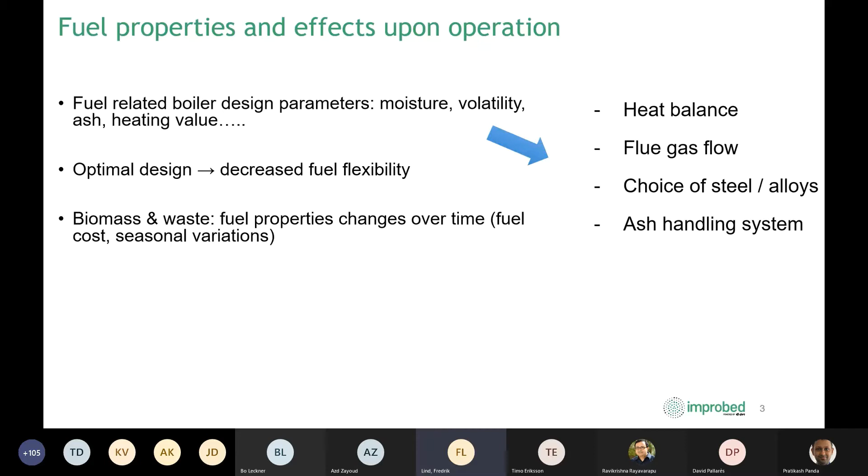One thing which is quite common or well known is that biomass and waste change over time the fuel properties, because we actually follow fuel cost, and there can be seasonal variations of the fuel. One example of this is a quite new build boiler in Sweden, Stockholm, which was taken into operation in 2018. It's a quite large biomass-fired boiler, 400 megawatt thermal. It has also been equipped with a pilot CCS these days.

After 1 year, they realized that they would like to change the fuel mix and add on 50% of recycled wood waste. This, in fact, led to them having to totally rebuild the ash system if they would go for this.

The mixing of air and fuel: there has been a lot of changes in this way, where you can actually feed air in many positions, increasing the possibility for the fuel to meet the oxidizer. We also have much faster O2 analysis today, which gives the system a chance to react on a change in the fuel feeding.

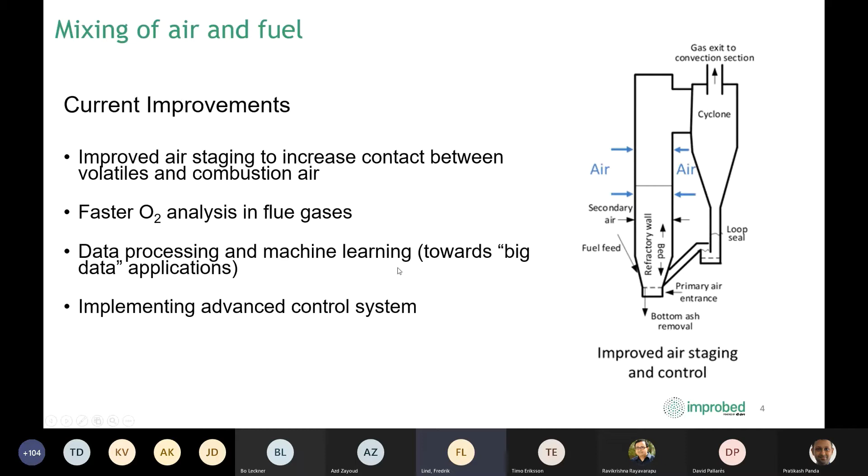We also discuss today artificial intelligence and how we can learn from big data and how we can actually apply this to get a more robust and fast system. In other words, we can implement quite advanced control systems today.

Instead of fans for the air feeding, it has air compressors, which can increase the pressure of the air into the boiler, meaning that you can penetrate more into the furnace. It also has a quite advanced control system.

So questions, does this work? Yeah, it works good, but sometimes you have CO violations. You could have high furnace and cyclone temperatures due to uncombusted fuel going into the cyclones. And this can also create sometimes a lower operating time than you actually prefer.

We've seen in our boilers that we have somewhat maintenance experience that comes back, or maintenance issues. For example, in one of our 75 megawatt CFB municipal solid waste boilers, we had a problem with the vortex finders in the cyclones. Due to that, we have sometimes high temperatures due to uncombusted fuels going into the cyclones.

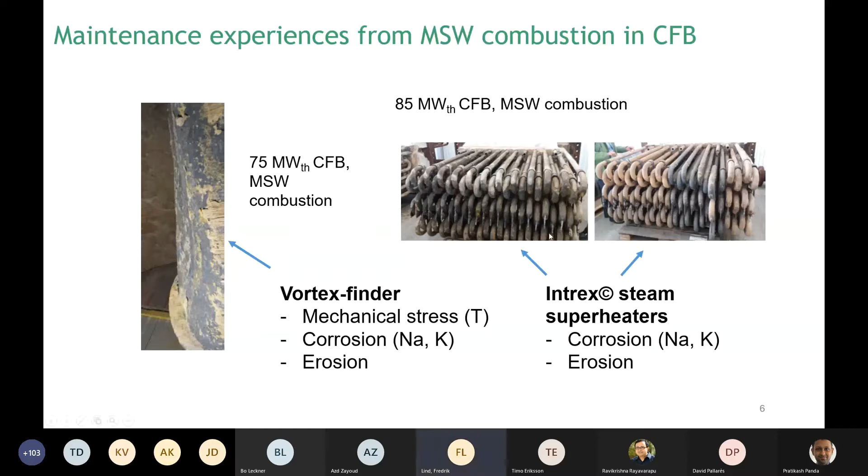We also have some corrosion issues from potassium and sodium, and erosion from the bed material itself. We can also see that our Intrex steam superheaters in the bed's loop seals are affected by corrosion and erosion. Actually together, corrosion and erosion can be a really big issue, because as you have the corrosion, you create this protective layer of an oxide on the tubes. But then you have the erosion from the bed material that all the time takes away the protective surface.

So if we talk about bed materials, the object of bed materials is to secure the heat transport. That is if there's not enough ashes in the fuel, so that can be the bed material. And it should also be the right particle size. A bed material should have high abrasion resistance, but it should also have a low erosion impact on the boiler material. There are a lot of different bed materials, and those have different properties.

They could be active, and they could need some things to be activated. And we know that alkali interactions could lead to agglomeration. As far as I know, on the research basis, there has been lots of tests of different bed materials. In Sweden, for biomass and waste combustion, silica sand is still absolutely the most common bed material. And the price is somewhat $50 to $65 per ton of this bed material.

So, some conventional fuels and bed materials in fluidized bed combustion. If we start with coal, the characteristic of your fuel is that you have a rather high heating value. A lot of the ashes are actually bound to the minerals in the ash. The bed material is the fuel ash and also sulfur capture agents like limestone, for example.

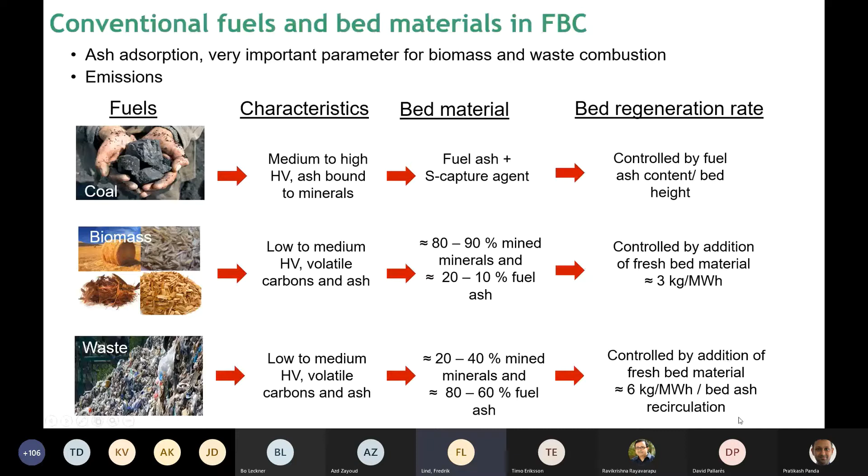And this is also something that you would like to control. As you have more problematic ash components in waste combustion, you would like to have a higher degree of regeneration. So you more or less double the amount of fresh silica sand per megawatt hour. Of course, it also depends on the quality of your bed material or your ash handling system after the boiler. I will discuss this some more later on, but the focus of my presentation will be on biomass and waste.

So silica sand is the cost. In Sweden, we consume roughly a little bit lower than 200 kilotons of silica sand each year for the purpose of combusting in fluidized beds. This actually corresponds to 25% of the total amount of silica sand extracted per year, and a price tag of around $10 to $12 million each year. So this is just what we put in as a bed material.

Some trends in Sweden and also Europe is that there is an increasing demand to combust waste fuel, cheap fuels, and also more complex biomass fuels. In Sweden, for example, we are now phasing out the last coal units, and we also reduce or even take away all the peat combustion. This is seen also as a fossil fuel in Sweden, or at least there is a CO2 tax on this.

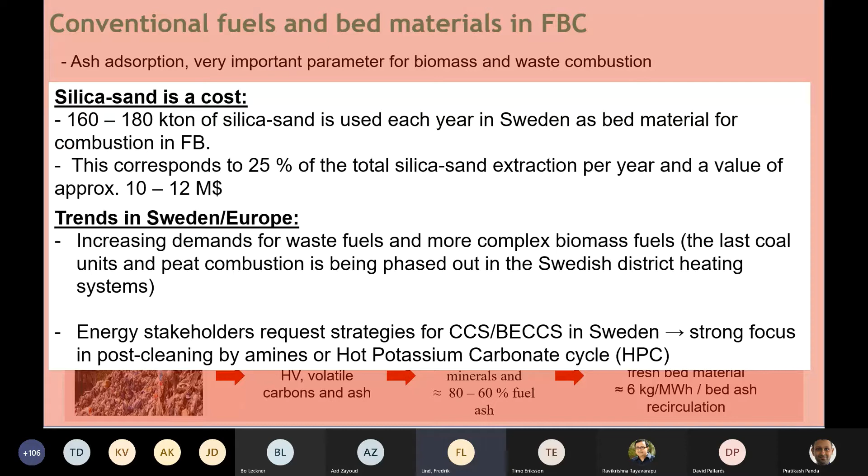I can also see in industry that energy stakeholders, both from the energy users and energy producers, are starting to discuss or request a strategy for carbon capture and storage. And in Sweden, there's a lot of discussion about carbon capture and storage. However, since there is a lot of existing infrastructure, there is a lot of discussion on post-cleaning by amines or hot potassium carbonate cycle, which has been used, for example, by Stockholm Exergi, a Swedish utility company.

So what is an active bed material? An active bed material is something that should introduce more benefits to the combustion system than the ordinary bed material. In this case, I will discuss something which we call oxygen carrier aided combustion. This was a concept that we developed at Chalmers, and simply is that you have a bed material that can do more things than just being a heat carrier.

Of course, it's not completely true, because silica sand, for example, in biomass and waste combustion, will also take up ash, which is good because then you have less ash in the volatile phase that actually ends up on superheaters or heat exchangers later on.

But one of the major points with oxygen carrier aided combustion is that you use a bed material that can transport oxygen inside the furnace. So you can simply take up oxygen and transport oxygen.

And there can also be other effects by ash. For example, that the ash is not ending up on the surface of the particle, but it instead migrates into the center of the particle.

Commonly, we discuss those from a perspective on natural ores. This was also discussed a bit by Bo Leckner with chemical looping combustion before. But in this case, we do everything in the same furnace or in the same reactor, so in the furnace of an existing CFB boiler.

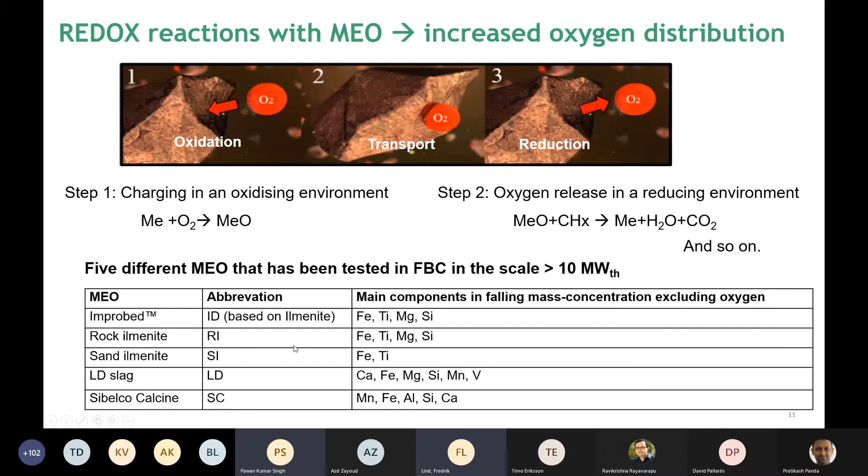So to give you some idea of what we have been doing with this kind of research, we have been working at scales from 12 megawatt, the Chalmers CFB research boiler, up to around 170 megawatt. We have tested a lot of different fuels, everything from really nice fuel like wood chips up to municipal solid waste, peat, and a lot of recycled wood.

Most of the tests have been done with Improbed, which is based on ilmenite with certain characteristics, so I will focus on ilmenite from now on. Ilmenite is a naturally occurring ore. It has a higher density than silica sand, roughly 2,600 instead of 1,600 kilograms per cubic meter, which changes the fluidization properties somewhat, so you have to adapt the particle size accordingly. It has been shown to be less abrasive than silica sand and less prone to agglomerate. Another important thing is that it's possible to separate it from ash using a magnetic field.

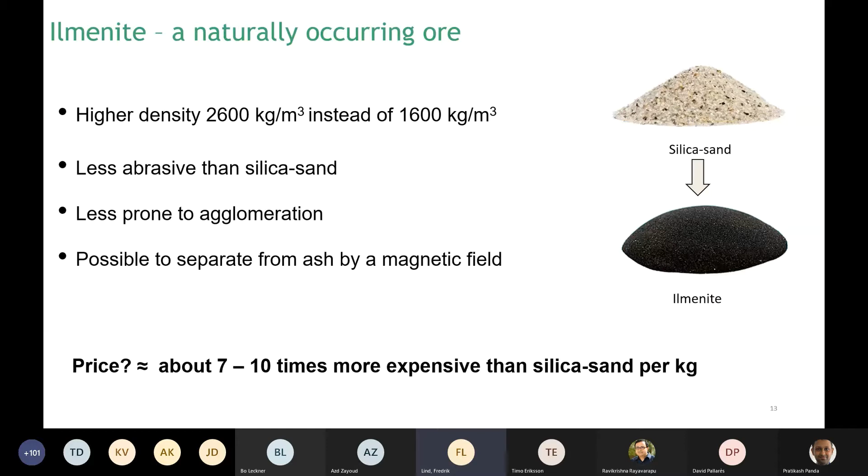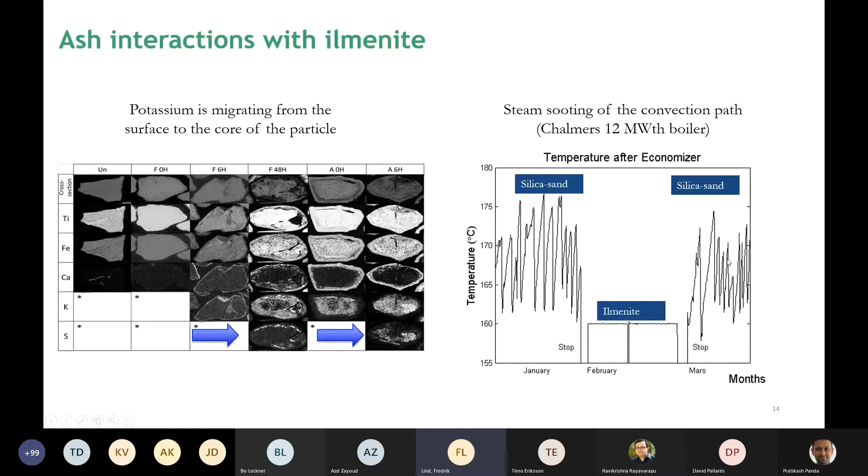So one explanation could be that we actually take up the ashes inside the particles. Another could be that you have a more smooth temperature profile in the furnace due to the oxygen transport, giving less locally high temperatures that can melt ashes which would otherwise end up on the heat transferring surfaces—so something about increased oxygen distribution.

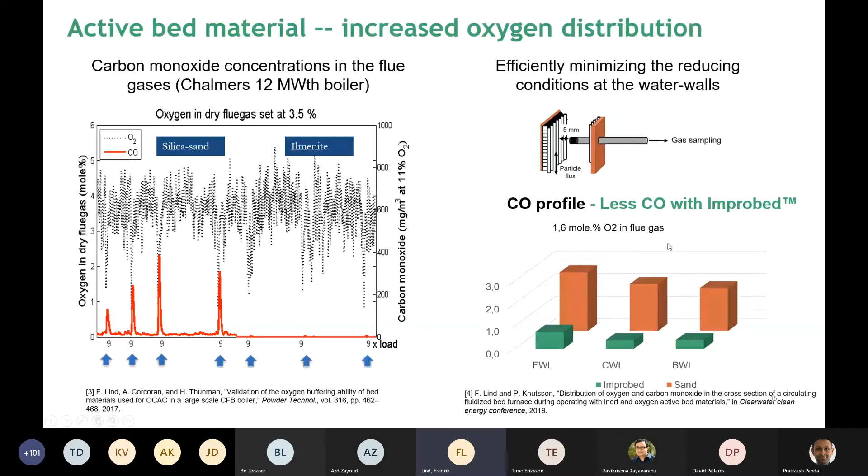When we operate with silica sand, we got a certain concentration of CO at 3 different points: the front wall where we have the fuel feeding, the center, and the back wall. Compared to when we stopped the boiler and operated with Improbed, there was a drastic reduction of CO close to the wall, meaning there will be more oxygen present close to the wall when you use Improbed instead.

This was in pilot scale. Now we tried to also do this in large scale, so we did it in one of the municipal solid waste fired boilers at Händelö.

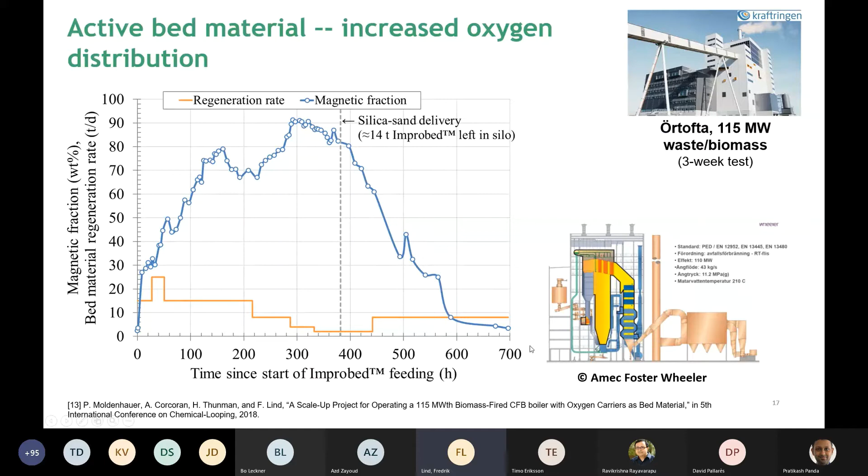So we could follow the concentration profile in the furnace using this equipment, and how much of the Improbed material actually was inside the furnace. We could see that as much as 90% of the bed was magnetic, meaning it was Improbed. We also tried different amounts of feeding to the system, and at some point we put in silica sand, and you can see a drastic reduction of the Improbed in the system.

So what could we see from this? In this case, we could actually increase the boiler load from 115 to 123 megawatts. And why could we do this? Because we could reduce the O2 into the boiler - we can reduce the surplus of oxygen. This is due to the fact that you can distribute the oxygen in a more proper way.

You can also see that we increased the boiler load by 8 megawatts, which is actually a 7% increase. This has never been done before in this boiler.

This is also an effect you can see: you actually reduce the amount of oxygen into the system. With silica sand, if you sum up all the gases - primary air, secondary air, and recirculated flue gases - you will have a certain amount of gas all the time. But as you remove air, you can also reduce the recirculation of the flue gases. As this material is less prone to agglomerate, you could actually have less flue gases out from the system. This gives you the ability to increase the fuel load, as you will not increase the velocity of the flue gases that could affect the convection path.

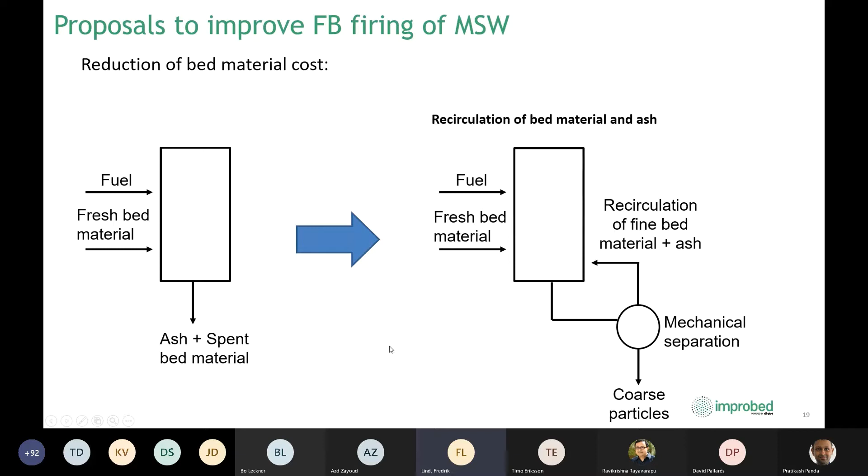Another way would be to also introduce a magnetic separator in this. So basically, you will have oxygen carriers. In our case, as I said before, we have been working with ilmenite and improbed. So what you do is simply take out the bottom ash stream, run it through a separator. You will have out the coarse particles, but all the other particles will go over a magnetic separator. And the magnetic particles, meaning mostly the ilmenite and the improbed, will then be transported back again to the furnace.

So in that sense, you will have a recycling of the particles. And the particles which are not magnetically attracted will simply be sent to the bottom ash system. And this will also include ash and spent oxygen carriers.

This system has been implemented now in one of our facilities in Sweden, the 75 megawatt municipal solid waste fired CFB boiler. And with this, we could see that we could actually reduce the total amount of fresh bed material from 11 to 0.8 kilogram per megawatt hour.

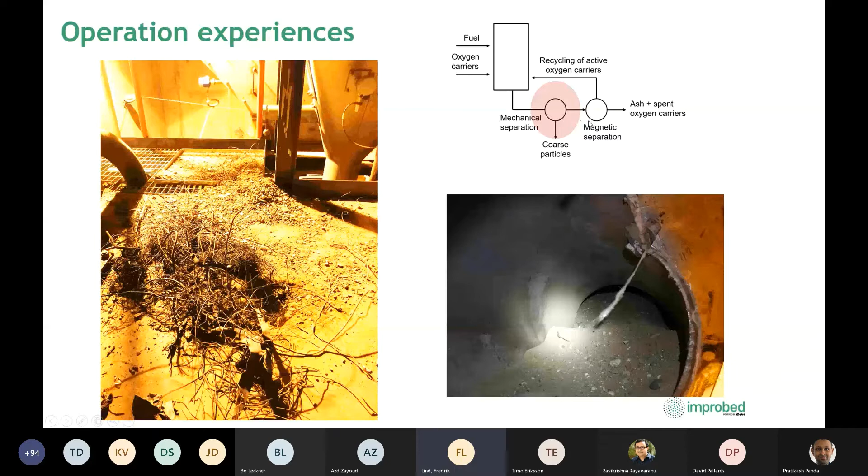However, there are some experience and some issues with this. We've learned that municipal solid waste is quite a tough fuel - you can see all the metal threads that come in with the fuel, and they get stuck sometimes in the sieving equipment. So this is now rebuilt to have a more robust system, but the magnetic separator works actually properly as it should. So this is something that is now being rebuilt.

There is also another twist on active bed materials, and as Bo was mentioning before about chemical looping combustion, we also heard about oxyfuel combustion in fluidized beds. This has been done a lot in research scale, especially chemical looping combustion in research scale. We think that what you can actually do is use those experiments done now at large scale, because we have tested different oxygen carriers.

We have learned much more about lifetime, and also, not to forget, which you never really see in those lab scale experiments, is the ash interaction that appears with oxygen carriers, and also boiler performance on how this works. So we believe that this can actually motivate learning more about oxygen carriers and what kind of technology you choose with the fluidized beds. The oxygen carrier could actually make a great effect. One of the motives is that you could already benefit from using this OCAC concept, because you could get things like increased efficiency and less agglomeration, for example, if you have issues with that.

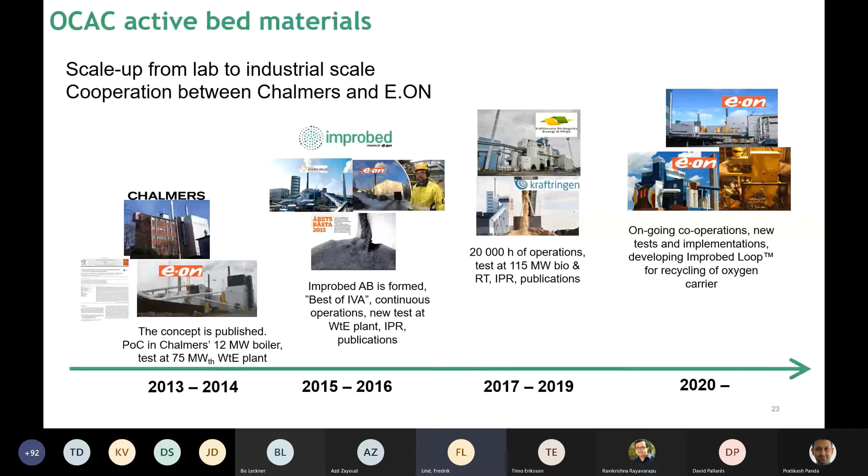To sum up, we need to learn more about this system, how to recycle the bed particles, because it's still more expensive than silica sand, but we can see that there are great benefits from using this bed material. So I'll stop there. Thank you for listening.

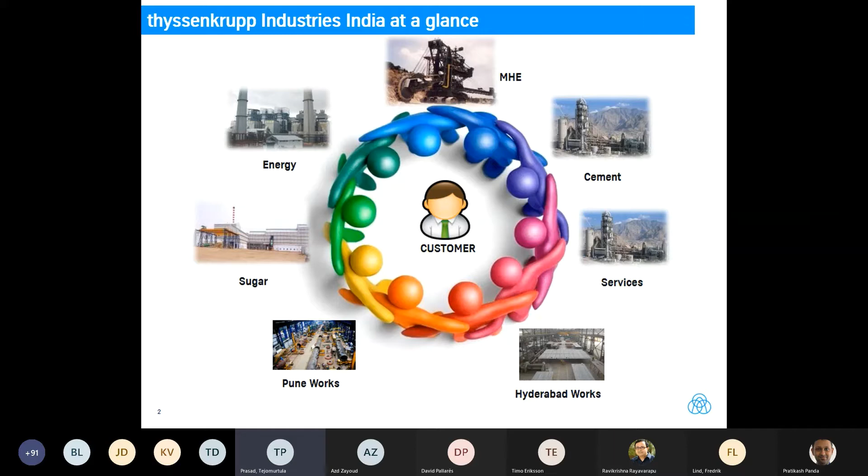We are committed to the environment. We make fluidized bed boilers, also cement waste heat recovery plants, steel plant waste heat recovery plants, biomass fed boilers, to name a few.

These are the offerings we have. We have reheat in the range of 300 megawatt, 300 tons per hour up to 1000 tons per hour. We have non-reheat up to 500 tons per hour designs available. We have vast experience with bituminous coals, as well as petroleum coke, lignite, and also to some extent biomass firing. We also have experience with hydrogen firing.

Mr. Prasad, you're muted. Could you please unmute yourself? Yeah, am I audible now? Okay, I'm sorry.

We have a technology which is quite different from the rest of the world. We have complete heat transfer surfaces in the first pass. Our cyclones work at a temperature in the range of 400 to 450 degrees Celsius, and then the ashes are recycled back, which we call cold ash recirculation.

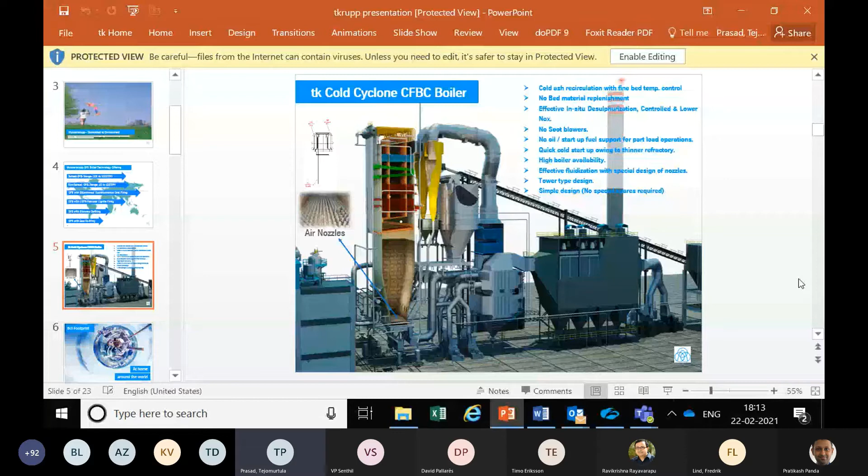We have no bed material replenishment required. We have effective in-situ desulfurization and very good control in reducing NOx emissions. We have no soot blowing equipment, and we don't need any oil to support part loads or low load operations. Since we have very thin refractory on the membrane walls, our startup times are much quicker, and we have demonstrated very good availability on most of our units.

We have exclusively improvised the design of the nozzles, which creates very effective fluidization in a tower type design. Normally, no special spares are required for our units.

We have a footprint at home of about 75 plus units across India, firing various fuels from low ash, 4%, to very high ash up to 60-65%, designated as washery rejects from coal washeries. We also have units with sulfur content from decimals up to 8%, which is petroleum coke, and units working with low moisture fuels as low as 4 to 5% and as high as 40% moisture coals, called lignites.

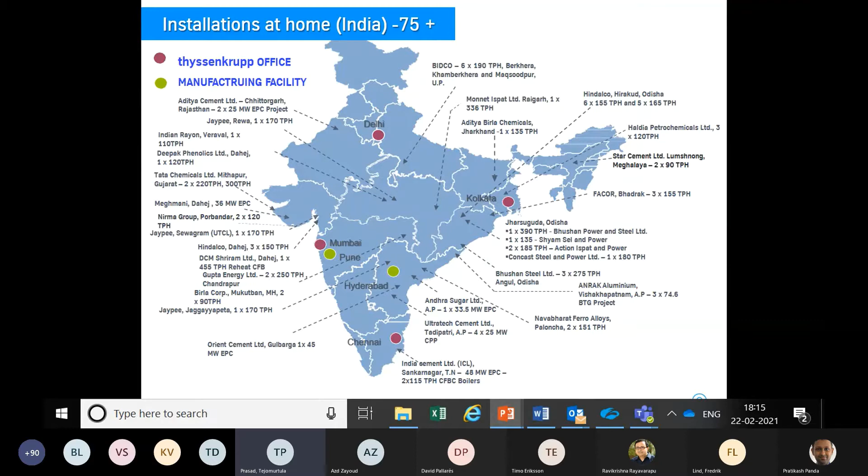Across the globe, outside India, we have 6 references: 1 in UAE, 2 in Indonesia, and 3 in Philippines.

Coming to clean coal technologies, there is pre-combustion cleaning, designated as beneficiation, washing, or coal drying. As the gentlemen before me already explained, there is gasification which can be on fluidized bed. Then one route is fluidized bed combustion, which is CFB. The fourth route is post-treatment after combustion as gas cleaning technology.

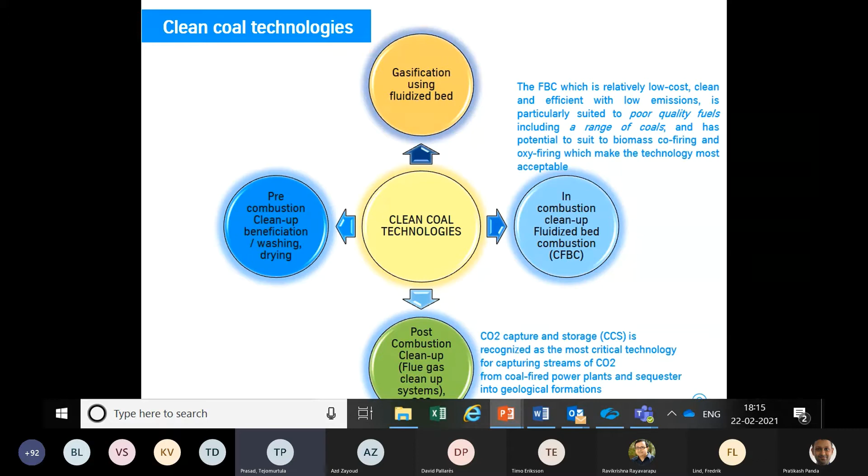Coming to CFB, biomass can be used as an alternate fuel apart from coal, as co-firing.

This has already been displayed by all our colleagues, right from Dr. Saraswat. As you move from the easier fuels toward the more difficult ones, you find fuels that are difficult to burn, needing careful analysis and design of the boiler to provide proper availability, proper combustion, and to handle emissions. These are all more challenging.

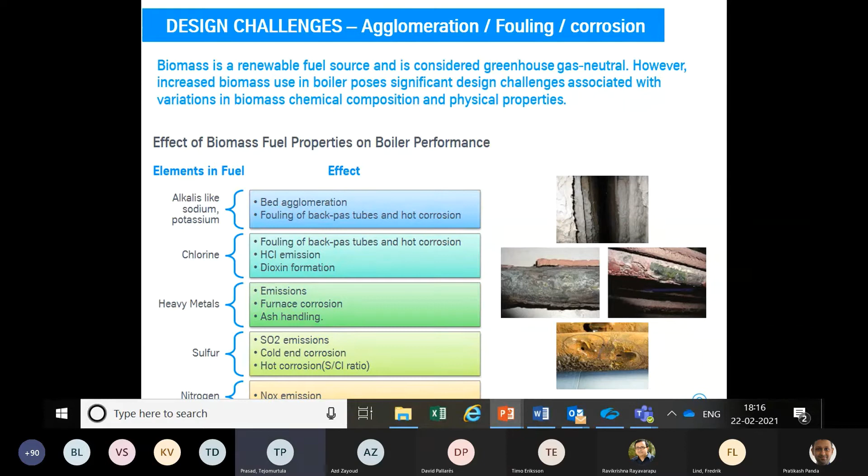We have also seen that alkalis play a very big role by way of bed agglomeration, fouling, emissions, furnace corrosion, and also pose problems to ash handling as well as emissions on the systems.

We have experienced some of the biomasses listed here in some of our units. We have experienced rice husk co-firing in our CFB, fired up to 10 to 12% in an existing unit having coal.

In another unit, we have seen RDF, with plastic powder sourced from outside, tried at something close to 15 to 20%. In one of the units we have also seen camel dung, which has good calorific value, tested and fired at more than 20%. So these are some of the experiences we have.

Apart from that, we have the gram dal stem, which is like paddy straw. They tried the stem to a small extent, but found that it was going and sitting on the heating surfaces, so they discontinued that.

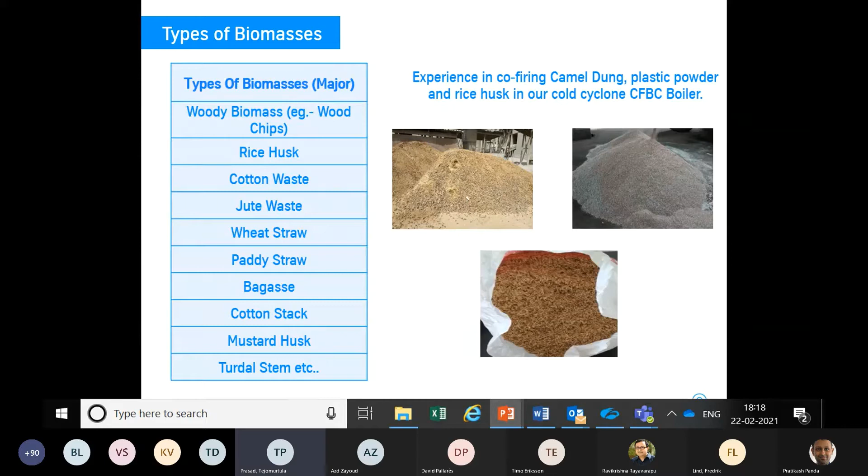These are some of the experiences we have seen in our existing installations. But we found that most of the time these are comfortable on an existing installation, properly giving the steam temperatures and pressures for which the CFB has been designed with coal. So co-firing to an extent of 10 to 12% is comfortably possible in any existing CFB unit. The only problem is the upstream handling system. If that is taken care of, a small percentage of co-firing in an existing unit is absolutely possible.

These are some of the benefits which previous speakers have already explained. CO2 emissions will be much lower because biomass fuels are CO2 neutral. SOx emissions will also be lower because biomass contains less sulfur. NOx emissions will be lower in line with the nitrogen content of the fuel. Dust emissions will also be lower, and there will be conservation of coal. This also results in a better environment, which can be beneficial for the Indian market.

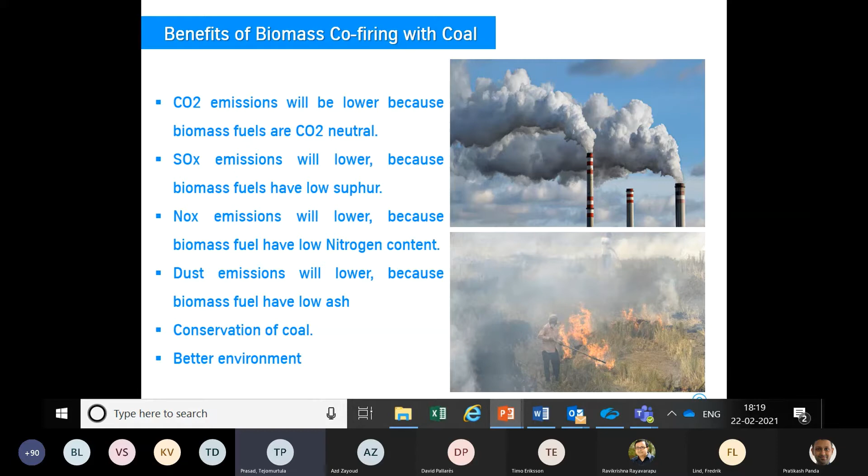Now coming to oxy-fuel combustion again. In this process, pure oxygen instead of air can be used as the primary oxidant. If nitrogen is removed from the input air, up to 95% oxygen can be made available for firing into the boiler. But flue gas recirculation is definitely required, because in air the ratio of N2 to O2 is 77 to 23%. So the moment we remove nitrogen from the air, the flue gas quantity reduces to very low levels, which sometimes causes problems for fluidization.

So in an existing unit, it will be difficult to try this fuel, as it will pose a lot of operational problems and may upset the fluidization pattern in the system. Whereas by employing flue gas recirculation, it will increase the CO2 level in the flue gases.

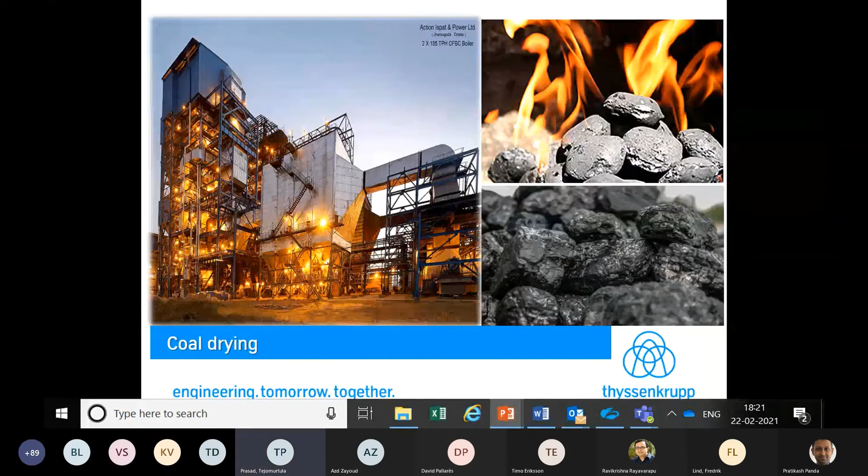Another clean combustion technology could be coal drying as a pre-combustion cleanup. Coal drying has benefits, as in the drying operation, surface moisture can be very effectively separated through evaporation. Lignites and subbituminous coals are mostly attractive for power plants in India due to their low cost and emissions. However, these contain high amounts of moisture as well as ash.

So when these coals are burned, evaporation losses will be to the tune of 5 to 7% in the case of high-moisture lignites, and 2 to 3% in the case of coals. This results in very high fuel flow, higher stack flue gas flow, lower plant efficiency, and higher maintenance cost compared to low-moisture coals.

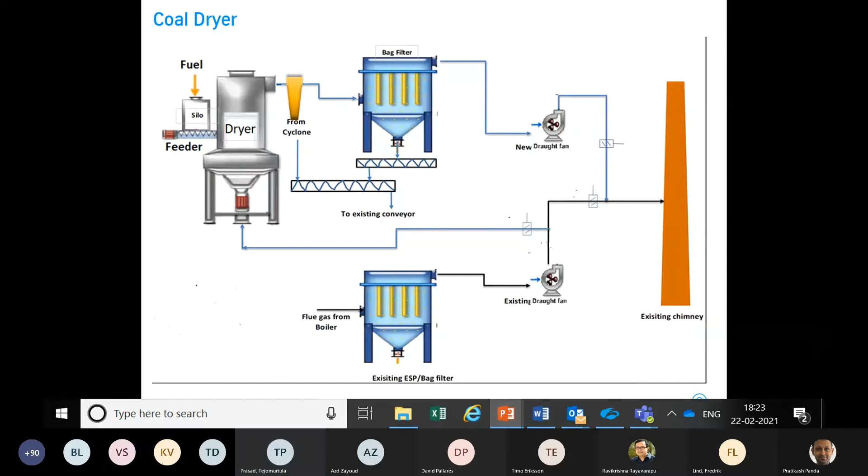We are developing a small pilot plant. It is at the engineering stage where we would like to test various fuels to understand the combustion characteristics of the various fuels, to understand the fouling phenomena, to assess the emissions getting out of the unit, and various fuels including biomass can be tested in this.

Even the oxy-fuel combustion can be simulated in this, and based on that, whatever modifications are required to be suggested to design the boiler, to alter the boiler, and go further on the system can be thought of.

So we are at the engineering stage at the moment for this, and we are looking for investors towards building this system. This is a 5 megawatt thermal heat duty based system we want to put in place, and there are no superheaters, evaporators, or drum in the circuit.

We want to only heat the water and then cool it back and then recycle it, so that our aim is to see how the combustion characteristics, fouling, and gas emissions are happening through the circuit. So whatever fuel is available, whatever fuel one would like to burn and test, this facility will assist in doing that.

So Mr. Frank, you can share your screen. Yes, I'm just starting it. Hope you can see it. Yes, Mr. Luschke, yes you can see.

Okay, thanks for providing me the chance to talk, and I'm quite happy to talk in between Mr. Prasad and Mr. Lakshminarasimhan from BHEL, because both of them I know quite well and have worked together with them some 10, 20 years ago in the history.

So I will provide you some information about Doosan and the CFB technology from our company. Hope you can see the second file which I have opened right now. This is the content I want to touch today, quite briefly, because half an hour is not so much time. I will give you a very short overview about the CFB history and the basics of the CFB.

I guess we can already skip that because it has been explained several times today, and most of you definitely know it quite well anyway. I will give you some ideas about the fuel flexibility and the range of fuels which can be burned, the advantage of co-firing coal and biomass, also the possibility of converting existing plants from coal to biomass.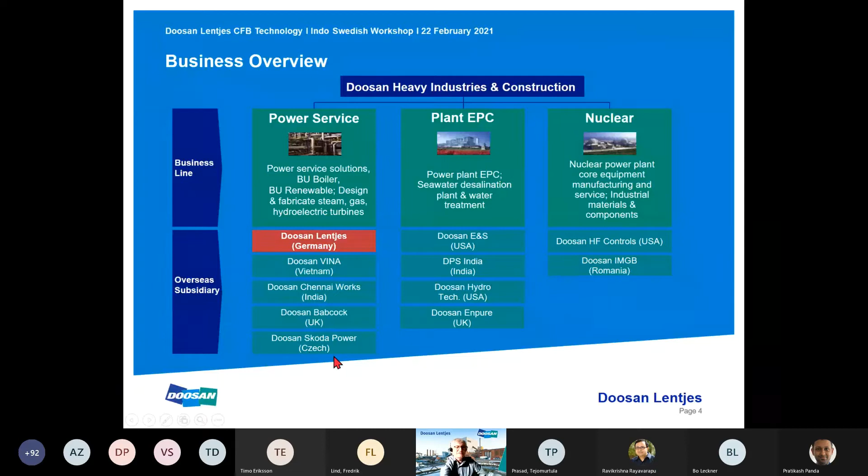As you can see, we are part of the so-called Power Service Group within Doosan, and there are some more European companies like Doosan Babcock in UK and Skoda Power providing turbines. But I guess this is not what you are so much interested in, so maybe I can show this instead.

Thanks to Professor Bo Leckner, he has helped me develop this diagram some further. It looks quite complicated, but what I want to show is quite easy. I hope you can see my mouse.

So it all started back in 1976 when a German company called Lurgi placed a patent for the CFB technology. Thanks to the very good people doing this, they covered a lot of the basics which are still valid today on CFB. Due to this, demonstrated by the blue lines, many companies, specifically boiler manufacturers, took license from Lurgi at the beginning to use the CFB technology.

You see all those lines, and the boxes with the different companies available in the CFB market over some time. On the left axis you see the years. As I said, it started in 1976, and you can see further down, just concentrating on my own company.

As I said, Lurgi put a patent, and then there was a joint venture, the green box between Deutsche Babcock and Lurgi. Lurgi was basically a chemical and engineering company, while Deutsche Babcock was a boiler manufacturer. They worked together. Also Lentjes joined. A company was founded called LLB, Lurgi Lentjes Babcock, which also gave licenses to different partners in India. We had some renaming, some taking over from other companies.

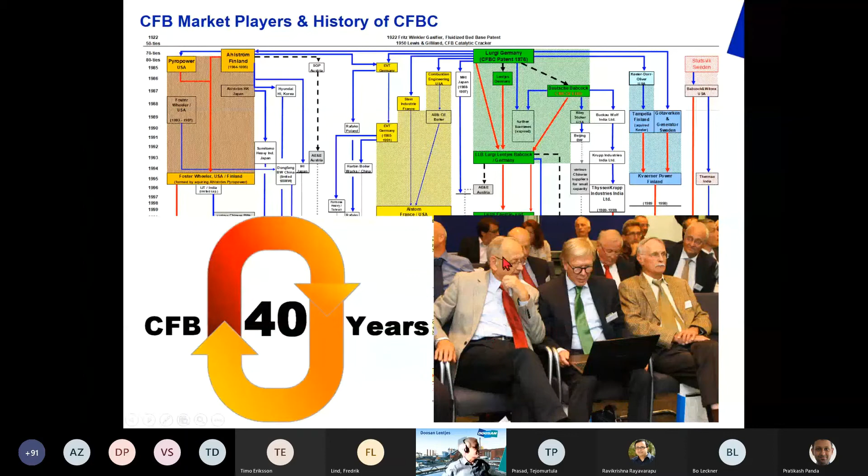So what is the difference between PC-fired boilers and CFB? It's quite easy to explain. On CFB, we can control the emissions by controlling the properties of the combustion process. By controlling the temperature, the air, and limestone addition, we can control the emissions to limits which today are valid all over the world.

If you have to do the same in a PC-fired boiler, and this is also nothing new to India, you have to add flue gas desulfurization and SCR units. The experience in Europe was, and most of my colleagues who have already presented will confirm this, once we had strong emission limits in Europe, the boilers built after that have typically been only CFB boilers so far, as the capacity required by the client was available at that time.

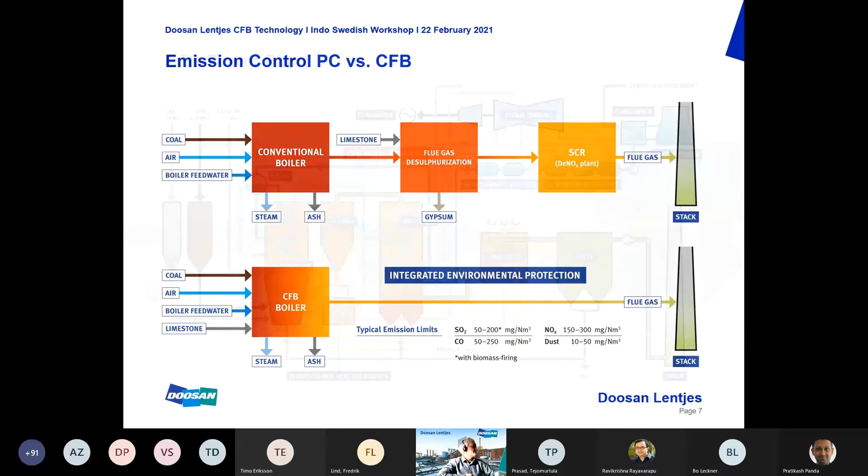Also this we have seen several times today. So this is how we show the different fuels which can be burned in a CFB boiler. On the left axis you can see the heat value of the fuels. On the bottom axis you can see the sum of the ash and the moisture, which typically is inert and cannot be burned. Surely when increasing ash and moisture, the heat value goes down. Those edges demonstrate the typical fuels which are available on the market.

It has been demonstrated by our CFBs, as well as by all of the competitors, that all these fuels can be burned very satisfactorily in a CFB boiler. Also, it was mentioned today in one of the presentations that due to the higher oxygen content in the biomasses, even though they have a very low ash content, the heating value is comparatively lower than on the old fuels like coal and lignite.

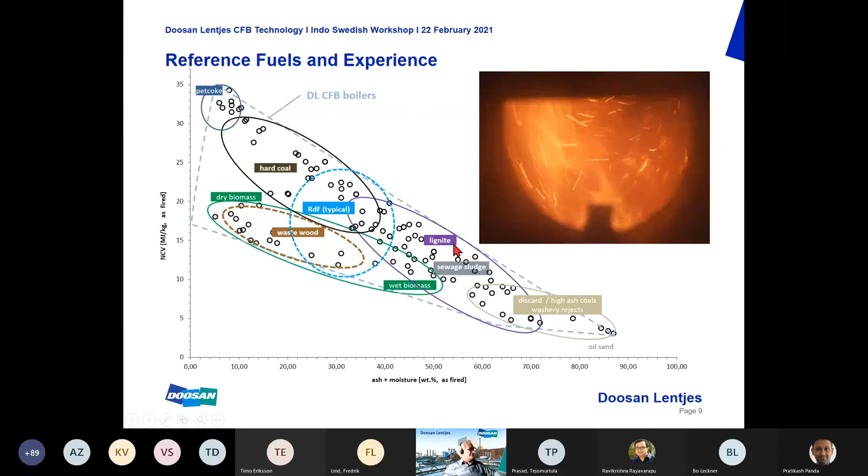This looks a little different than most of the others shown today, but the information behind it is the same. We have so-called standard fuels where we know very exactly how a CFB plant should look. This is the standard design for bituminous coals, hard coal, pet coke, anthracite, and some portion of brown coals.

We also have very difficult fuels which need a specific design and provide specific design challenges. This is typically waste wood, as you can see in this picture, very common in Europe right now. It's called waste wood, sometimes called biomass combustion even, but basically it's waste which contains wood. It sounds much better to say biomass combustion. Nevertheless, because of ingredients in this kind of fuel like paint, heavy metals, maybe screws and nuts, you have to take specific precautions in the design of your CFB to operate it sufficiently. The same is valid for some portion of the biomasses shown here.

So why all these efforts on biomass? This was also discussed in the left diagram. You can see the different solid fuels available on the market today. The left side shows fuels which have been stored for millions of years, having stored the CO2 they took out of the atmosphere. On the right side you see fresh wood, which takes CO2 out of the atmosphere right now. This is how biomass combustion is counted.

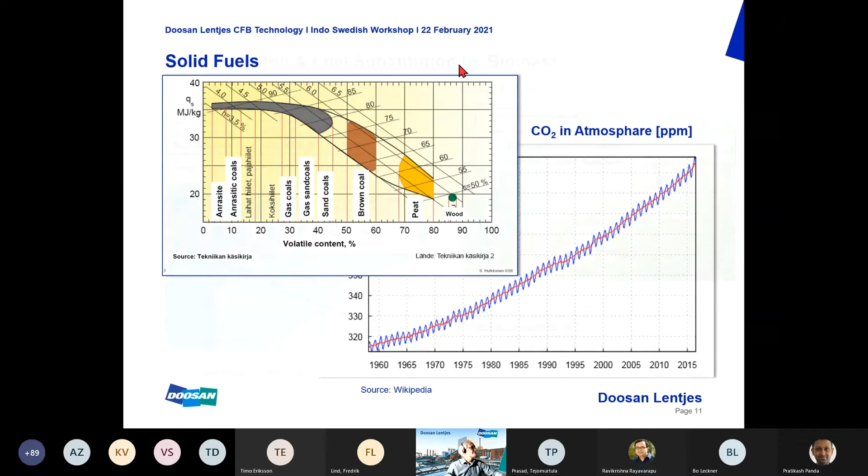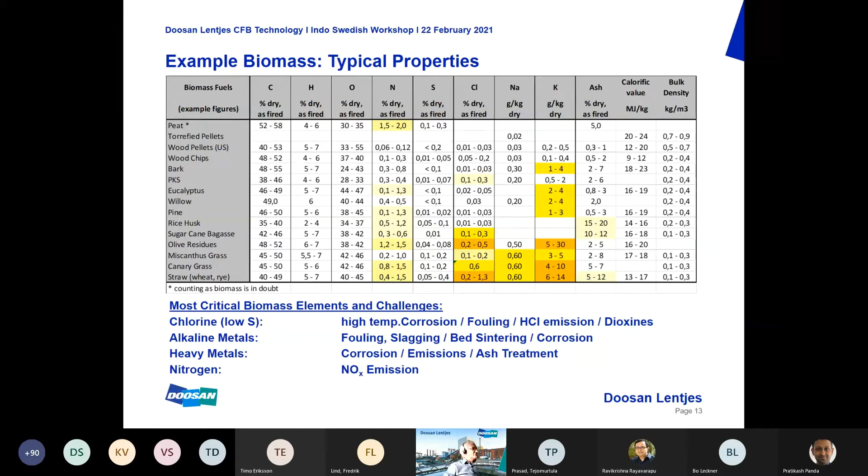Corrosion, as I said, is one typical risk for biomass combustion. There are two typical corrosion risks in a boiler, not only CFB boilers but every kind of boiler. One is the so-called cold and low temperature corrosion, typically related to SO2 and SO3 in the flue gas. This is what we quite well know from coal combustion, and it's related to the design of the air preheater, the economizer, and the flue gas exit temperature we have to design for in a boiler.

More critical is the so-called high temperature chlorine corrosion, related to the chlorine content in the fuel, which comes up at about 450 degrees C and drastically increases with temperature. Important: this temperature is not the flue gas temperature, it's the surface temperature of the tubes. So this is related not only to the flue gas temperature and chlorine content, but also to the steam parameters. If I have a higher temperature inside the tubes, the metal temperature on the surface will also be higher. This is very important to learn, especially for co-combustion, which I'll come to in more detail later.

We also noted that if we have a sulfur to chlorine ratio of, let's say, 4 or more, typically we do not have a real problem with chlorine corrosion. We will definitely have a problem if the sulfur to chlorine content is much lower than 2. This is the reason that in pure biomass combustion, we do not do any desulfurization in the combustion process anymore, because biomass already contains lower sulfur content, and under those conditions for pure biomass combustion, we are quite happy to have at least some sulfur in the flue gas to reduce the chlorine corrosion risk.

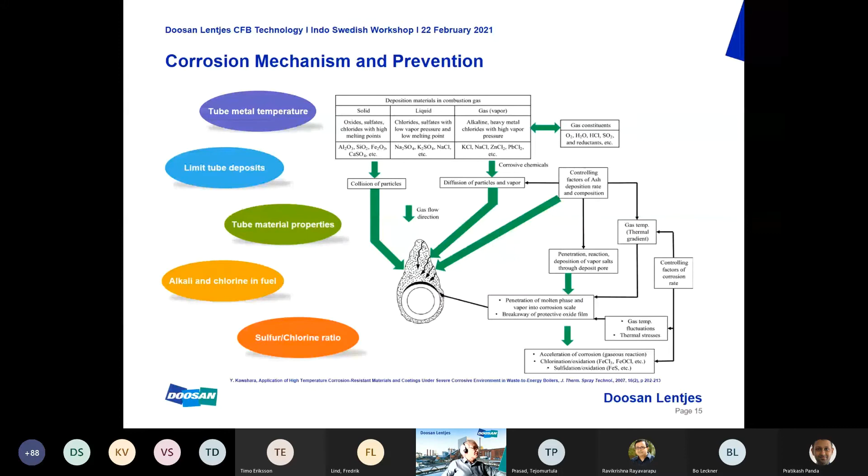So just to sum up, these parameters play an important role in the corrosion issue. This is, as I said, the tube surface temperature, and this is determined by the flue gas temperature and by the fluid temperature inside the pipe.

In addition, surely the chlorine content in the flue gas and its species is very important. As I said before, also the sulfur content in the flue gas plays a role - in this case, a higher sulfur content is better than a lower sulfur content. The alkalis and related chlorides are important for the mechanism behind the corrosion issue, and also the O2 content in the flue gas, by oxidizing or reducing atmosphere, plays an important role for the different corrosion mechanisms. Also, the thermal gradient in the deposits plays a role, and finally, surely the flue gas velocity.

This was also said in one of the previous presentations, that typically corrosion and erosion always play hand in hand, and tubes which are already affected by corrosion will be finally destroyed by erosion, or the opposite. So this is something specifically for CFB which has to be taken into account.

I will just show one reference today, because this is a very interesting reference. This is our plant in Berlin, in the German capital. This plant was commissioned back in 1989, and this plant was designed - you see the same diagram as we had before - specifically for hard coal and for the addition of a very few portion of lignite, possibly. And so just a short history.

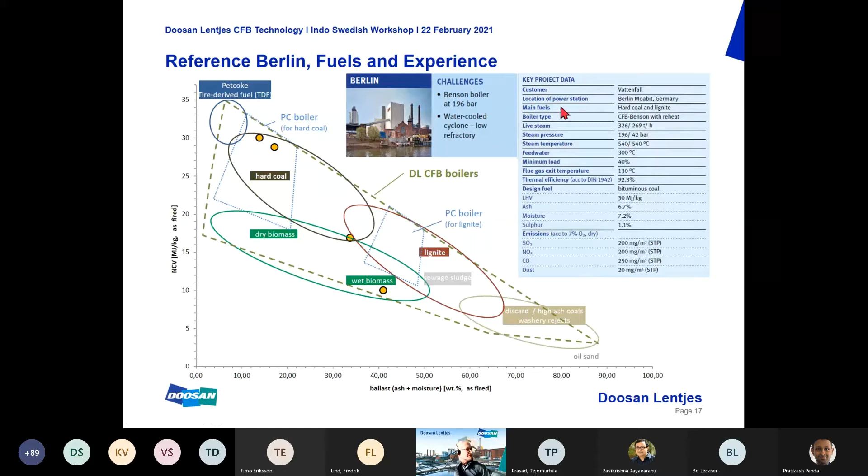And this means that we already have still high surface temperatures on the tubes. Even though with 50% of biomass, the plant still today operates very sufficiently. And there is a future discussion ongoing to convert this plant even to 100% biomass.

So what has driven the operator to this decision? They had an existing 20-year-old boiler, designed for combined heat and power. This is also very important if we talk about efficiency.

Because under those conditions, at least in wintertime in Europe, when it is quite cold in Germany, they provide a lot of district heating to the surrounding living areas of the people. And that means under those conditions, the plant operates at an efficiency of 85%, which is, I guess, almost unbeatable. Then, as I said, there was a decision to substitute about 50% of the combustion heat by wood.

So what they had to do is look for the available biomass around Berlin city, so as not to have too much transport capacity. And as I explained at the beginning, because of the lower heating value of the biomass combined with the lower density, they needed additional storage at site of 9,000 cubic meters for this additional biomass.

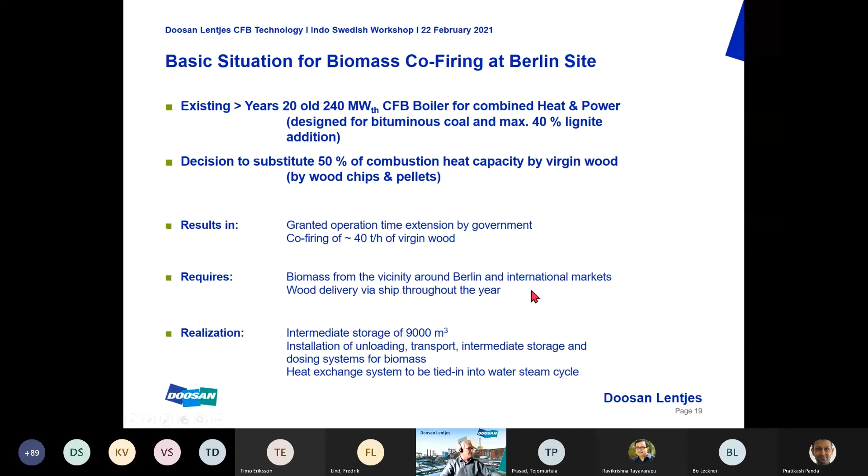And when they decided to increase the capacity, they added a ship unloading system. Fortunately, the plant is on a channel, so they could use this transport way by ship. They used an old existing turbine hall, which was not in operation anymore, and this was converted to the biomass storage. Quite an interesting solution, but there was no other space inside.

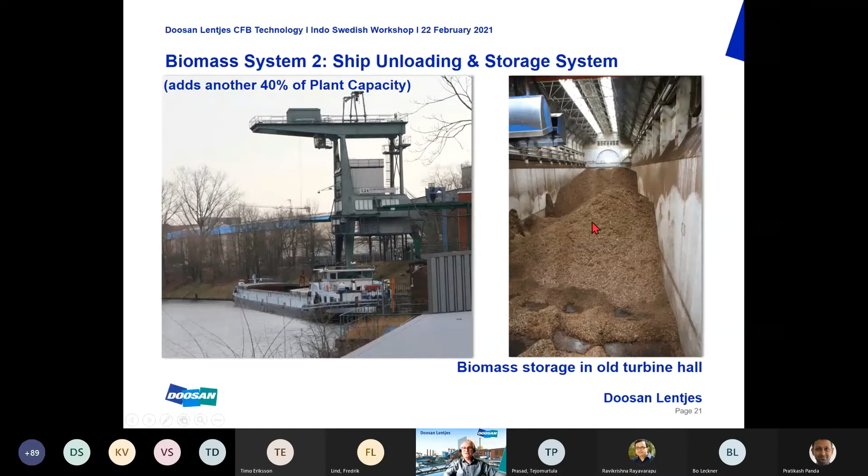So discussing what fuels are possible, what are the alternative fuels for co-firing in CFB. On the left side, we have the more conventional fuels, which is bark, biomass, wood pellets, and so on. On the right side, we have the more difficult fuels, which is packing materials, pulp sludge, RDF, sewage sludge, and so on. All of this can be co-fired in CFB.

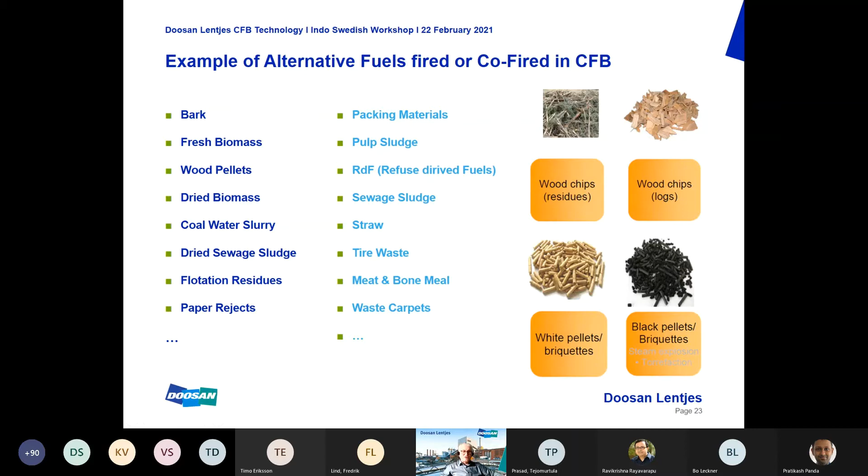But as I said, once you have a CFB, an existing one, and you want to burn one or the other material in a certain portion, you should talk to your supplier and discuss what you want to burn, how you want to burn it, and how much. And I'm sure with existing CFBs, with almost all of them, there is a solution for what to do.

Coming to, let's say, this is my personal expectation, what is the advantage of co-combustion. This I would just take in comparison to biomass-only combustion. So if we do co-combustion, we can use the advantage of the higher efficiency due to larger boilers and the higher steam parameters, which are typical with larger boilers.

So even if we go up to USC conditions with 620 degrees C and 280 bars, which is state of the art today for PC as well as for CFB, then we can gain the high efficiency of 44-45% from these high steam parameters, but still not have the risk of biomass agglomeration, fouling, and corrosion, which will happen in case we have to burn 100% biomass. This, from my point of view, is a quite important figure.

Also with the coal ash, and this is specifically valid for India with high ash coals, we still do not need any sand addition for the biomass. So you can even reduce the ash content for the ash extraction, save some money on this, and still not need sand addition, which was also presented in one of the earlier presentations, that in case of 100% biomass, you have to add something, sand or even more advanced materials, to keep the fluidization process and the CFB system running.

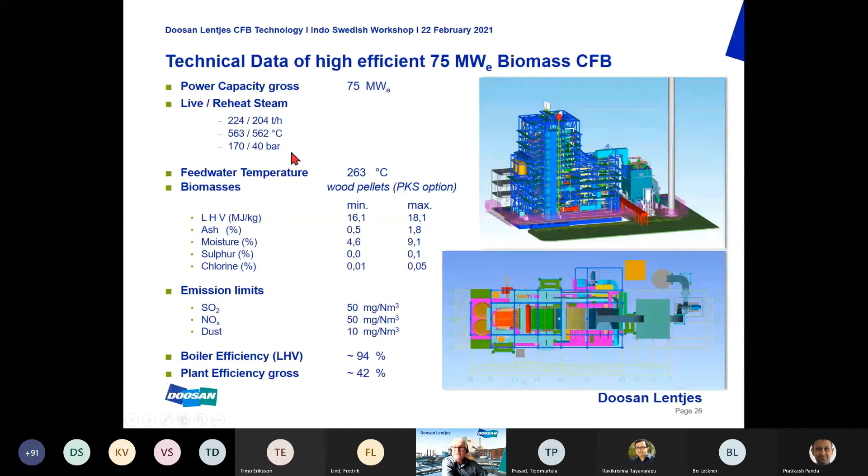If accepting biomass for this kind of steam temperatures and steam parameters, we have to limit the chlorine content as well as the alkali content in the ashes to certain amounts. And this is what I said before: we as a designer - and this is valid for us, for Foster Wheeler, for ThyssenKrupp, for BHEL, for all the others on the market - we need to know exactly what fuels you want to burn. Only then can we decide what steam parameters we can offer for this kind of fuels. Looking back to the picture before, if we then decide to reduce steam parameters because your fuel may contain more chlorine and more alkali than we would accept, then surely the plant efficiency will drop accordingly.

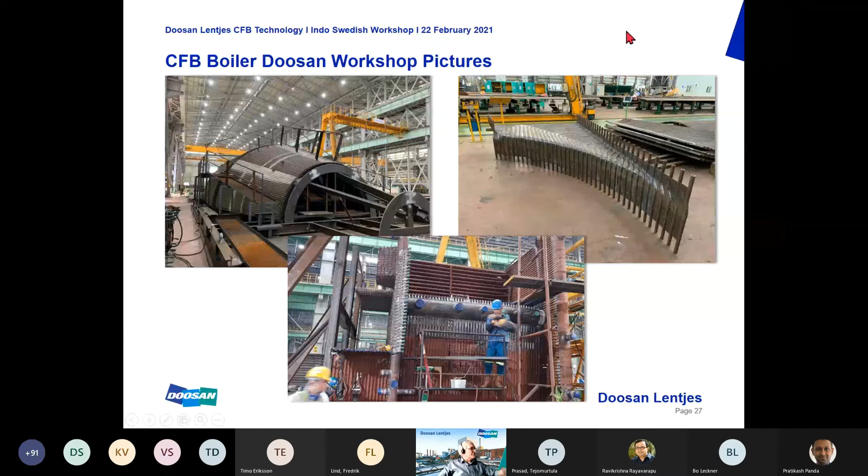These are some pictures from the workshop from the plant, which is in construction right now and will go into operation next year.

Also, the cyclone is a water tube type, which means instead of having 30, 40 centimeters of refractory, we talk about millimeters now, which is just an erosion protection, no heat protection anymore. So it's a so-called water-cooled cyclone in this case.

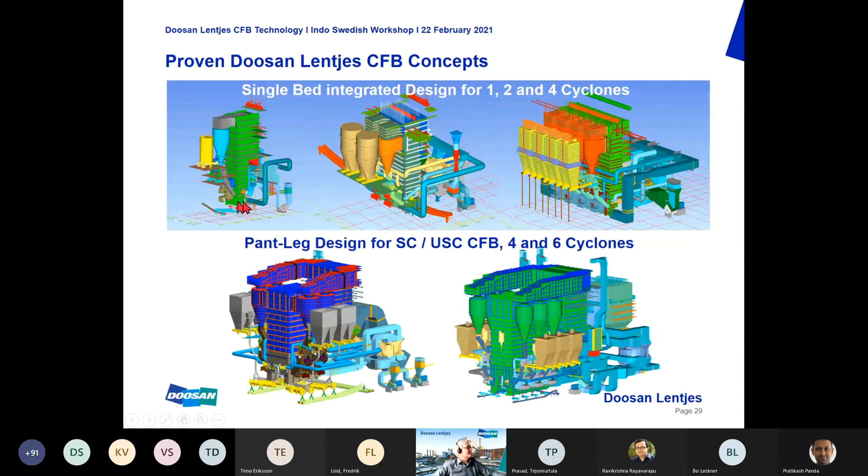As I said, in such a boiler, adding 10% or 15% of biomass could just delete the use of this kind of boiler on the pure biomass basis.

So ultra supercritical CFB, just a few facts how this looks like. The unit size we have designed is typically up to 600 megawatt gross, can be more or less, but this has turned out to be a quite economical size. We use 6 cyclones in this case. This one was designed for Indonesian fuel, easily available on the market, with steam parameters of 610 and 620 for the final superheated steam and reheat steam, and steam pressure of about 280 bars. With these conditions, we reach SO2 limits of less than 50 ppm, NOx also less than 50 ppm, and dust even lower than 15 ppm.

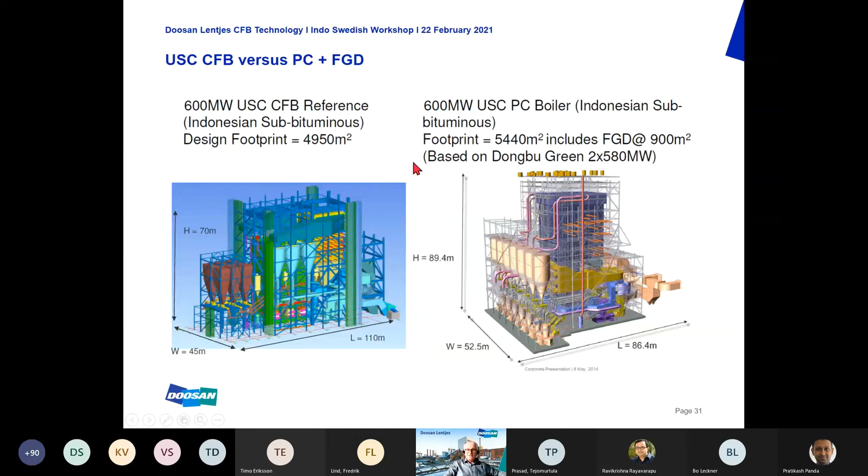A comparison of a 600 megawatt CFB and a PC boiler shows that even the footprint, not the CO2 footprint but the size of the plant, is lower in case of a CFB unit. This adds to the point that with a PC boiler you would still need additional FGD and additional SCR, as explained at the beginning of my presentation. These additional systems are additional plants, so they also require maintenance and service, and can even be a reason for a shutdown of your plant because of some problems, limiting your availability. So if I had to go for a 600 megawatt unit today, under the given emission limits, and even with the chance of using the flexibility of a CFB system, I would always go to a CFB system.

Due to the fact that we are today talking more with university, I also want to show what we have learned.

Sorry to interrupt, Mr. Frank. How long might this take? Can we conclude in another 5 minutes? I guess 5 minutes, not longer than this. I'm almost close to the end. Okay, great, thank you so much.

This is quite important for good carbon burnout as well as for lowest possible emissions, that we have a very good temperature control and profile over the boiler. Another example of what we can do today with CFD before building the real plant, which we do on all our designs: on the left side we see a starting point of a 600 megawatt CFB USC, and on the right side what we have learned doing the CFD and modified. You will see the O2 fractions over the height at different locations. I won't go into the details of what we modified in this learning process, but you can definitely see the improved distribution of O2. This optimized distribution of O2 is surely linked to much lower emissions, better carbon burnout, lower erosion risk, and so on. This is definitely what we can do today and how we design today.

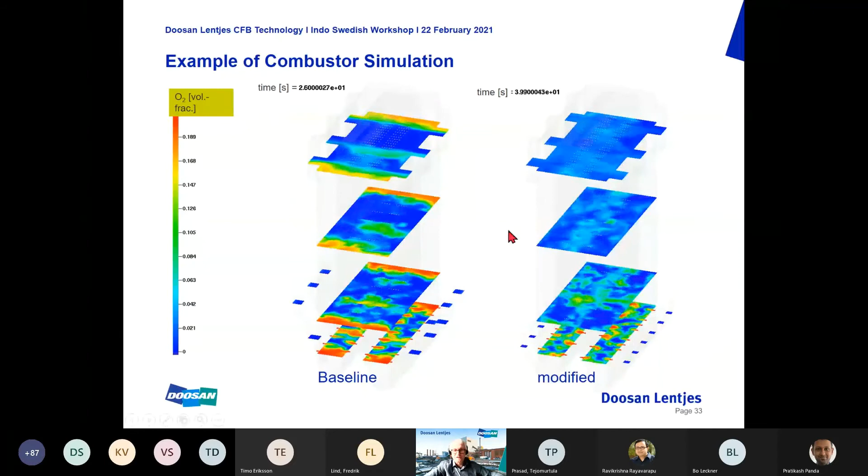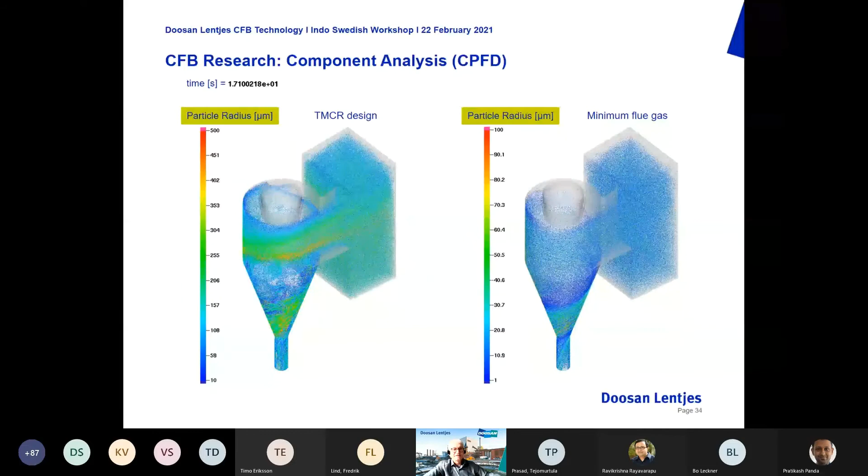The same, and I'll skip this, is also valid surely for the cyclone design. We learned a lot also doing different analysis on the cyclone and have introduced what we have learned into our actual designs.

As said before, in CFB we have to control the emissions already with the combustion process. This is an advantage and a disadvantage, but over 40 years I guess we have learned very well, we know what to do. We have to do temperature control, air stoichiometry, and also calcium to sulfur ratio, and all these have influences on the different emissions. Very important, and this is something we have to keep in mind always, temperature control in the CFB is really the key issue for the control of all the emissions. I have to say there are typically sometimes cheap CFB designs available on the market which do not have any temperature control.

And this typically provides a lot of problems in the operation as well as in the emissions. So coming now to low emissions and how to achieve low emissions. As I said, these kind of standard CFB designs, which have a limited air staging, no temperature control, and no absorbens addition, you can see what they can reach. Typically, the yellow highlighted is what we offer as our standard today.

So we have, thanks to the help of the CFD investigations, an optimized air staging and temperature control. We can reach already typically less than 200 milligram of NOx without any additional measures. The sulfur content truly is depending on the local limitations and on the limestone addition and on the sulfur content in the fuel. Typically, we can reach 100 milligram with only limestone addition, nothing else.

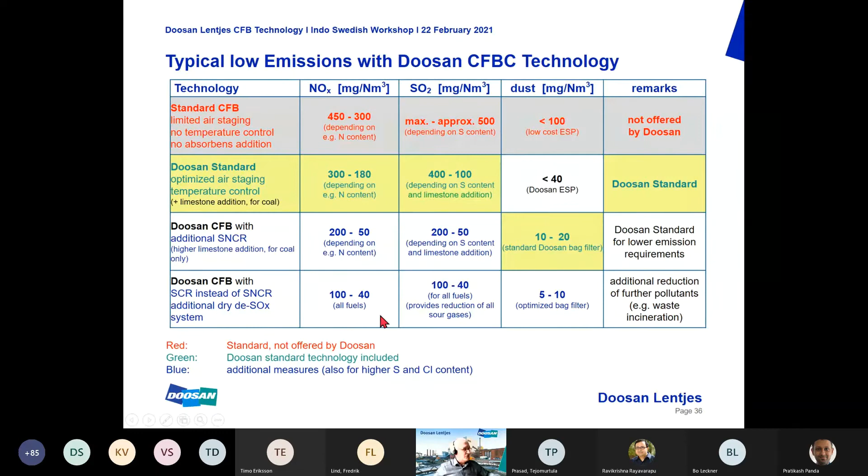In case, due to whatever reasons, you have to limit your emissions any further, there are still measures to reduce the emissions. And the last row shows what we have to do in Europe in case we design boilers, CFB or whatever type for waste, RDF and other things. So we have to reduce any further. All this is available and can be added to CFB as well.

Okay, this we have seen already, so I will skip this. I will also skip this just to come to the end.

So the advantages of the CFB technology have been explained several times today. Low combustion temperature, typically lower than 900. And as I said, quite important, we have to control this. The highest fuel flexibility, which ranges from petcoke to RDF, is only given with CFB. A uniform temperature distribution. We do have almost no formation of thermal NOx because of the controlled temperature.

We can do in situ SO2 capture just by the addition of limestone. We do have very good fuel and air mixing conditions, and the thermal inertia in the CFB is quite less and quite less sensitive compared to PC. So we have a very uniform temperature release, which makes CFB the best option for USC designs.

So coming to my last file, yes. The conclusion and outlook, and maybe we will have the chance for questions and discussions after the final presentation. So CFB, from my point of view, is the most flexible combustion technology which is available on the market today, especially with regards to the fuel flexibility, which for the operator is very important because it's related to operation cost over many years. The CFB provides the highest efficiency and still having lowest emissions.

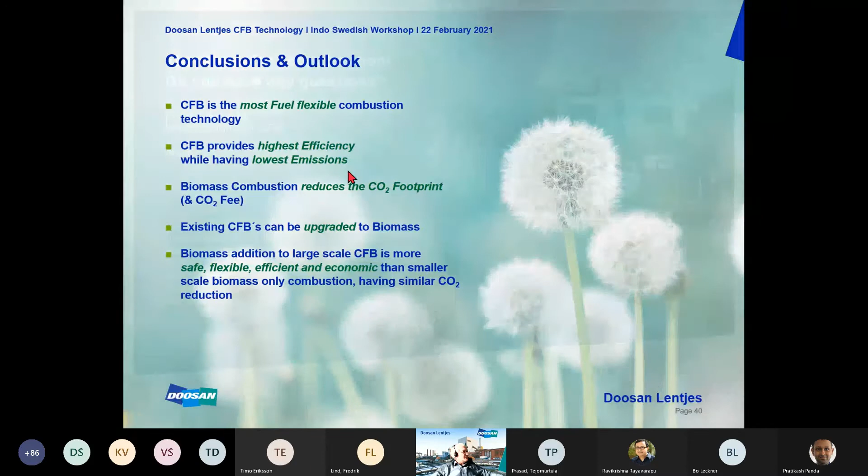Yeah, I guess so. That's it for the time being, and I hope I could give you some interesting insights, and maybe even could add something which has not been explained in the before presentations. So thank you.

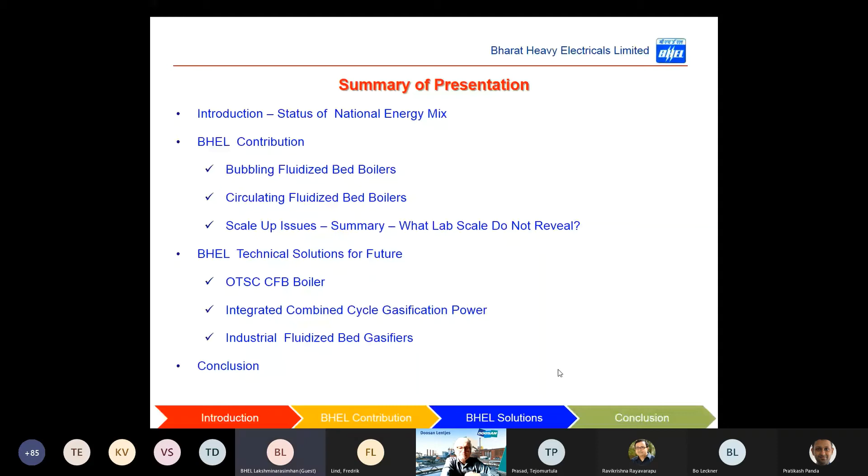Our chief guest had also indirectly indicated all these points. We are still dominated by coal, and coal is a very damaging word right now in the world because it is causing CO2 emissions. We have to be responsible, but we'll have to see how the technology transition happens. Right now, as previous speakers told, we have good SOx emission capture, NOx emission capture rates, even mercury. But what about carbon capture?

Professor Bo Leckner onwards, they have been telling about how developments are happening there. So I will not go into the carbon capture part of it, but I will talk about the intermediate stage in which we can leapfrog the technology.

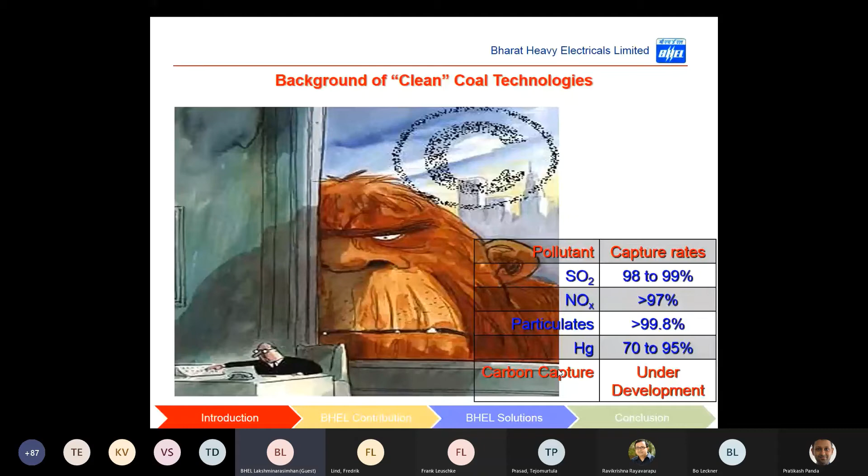Looking into the future, as our chief guest also introduced, even though our capacity is going to shrink from the high levels of 60s or 70s which we had, the contribution is still around 50%. So our immediate responsibility as a technology provider and supplier needs to address this particular aspect, that we take in biomass and coal in a proper mix.

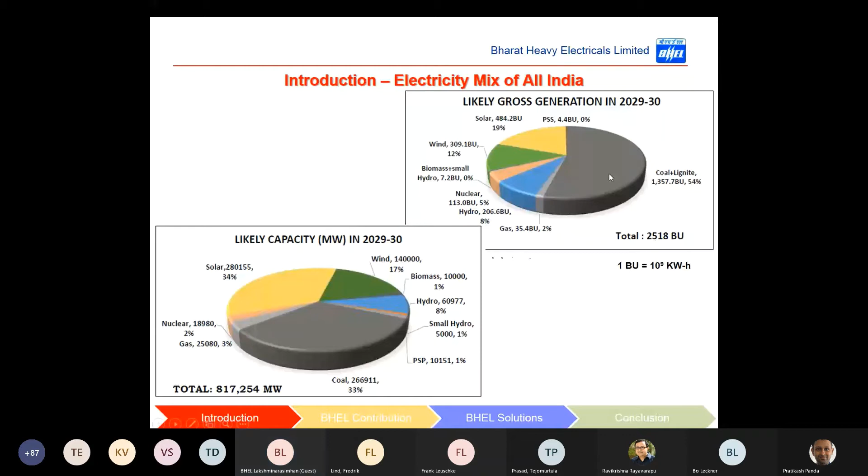I'll come very close to my home state, Tamil Nadu, because this state is very much endowed with high levels of renewable energy, very similar to probably Germany. We have a high wind power source as well as solar. If you look at the decadal change which is going to happen, the coal capacity utilization is going to come down to 40%. The percentage is a very misleading number, I'll explain in the next slide.

Whereas renewables is going to go up, as well as nuclear is going to go up. Because of this, Professor Bo Leckner was asking a question, and probably I'll answer it now. Yes, nuclear energy also we are in a very expansive mode, but it won't be reaching the levels of renewables or coal. That is the answer for the question.

If you look at the decadal change, 30 gigawatt of installation can generate around 97 billion units of power. But it is still dominated by coal, which gives around 70%. We are expecting renewables installation to go up from 36 to 57%, but the contribution is still questionable, with only 40% coming from renewables. Coal is still going to be around, and even with a shrink to the level of 30%, it is supposed to do the bulk lifting of power. This is very important from an energy security point of view, to sustain the entire industrial hub which Tamil Nadu and the southern states have developed.

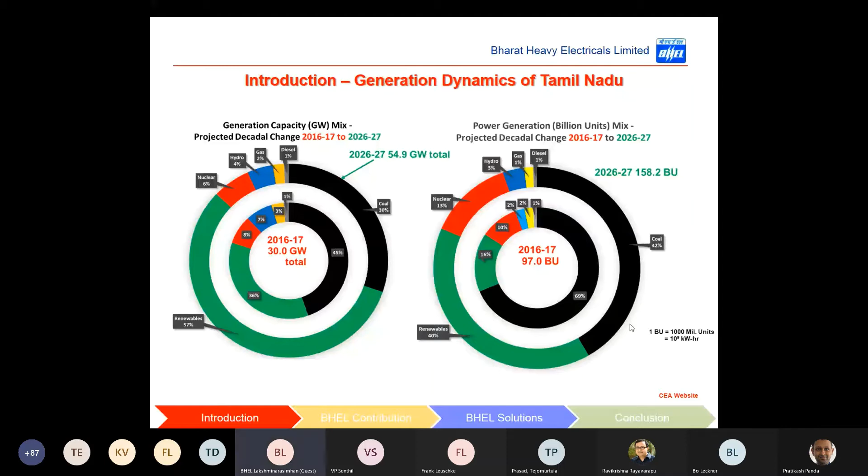Coming to the contribution BHEL has made so far, it is only history so I'll run through it very fast. We have contributed nearly 110 gigawatt of power, predominantly through PC fired boilers. You could see a very small growth of CFB boilers, and of course you can add all the competition too, but this will never reach the level of PF boilers.

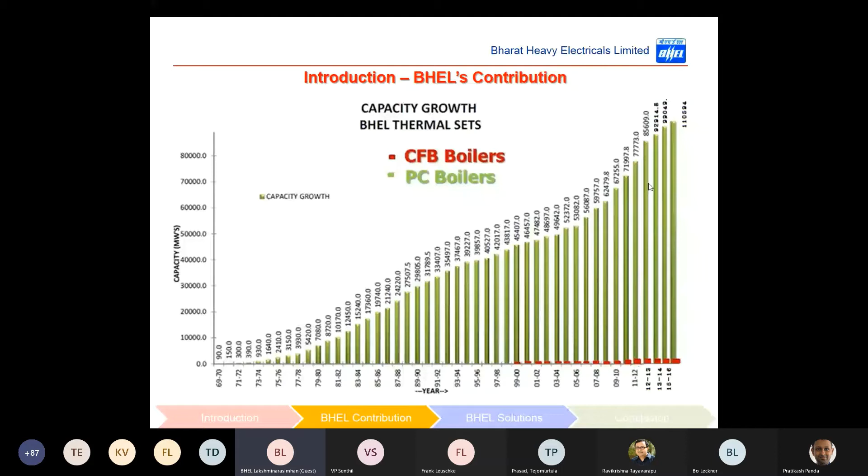The experience generated in PF boilers is quite high, and that is both a good thing and a negative thing, in the sense most operators are very much used to PF boilers compared to CFB boilers. This is one area in which our entire team has to contribute, in educating and coming back.

BHEL has had that experience way back in the 90s, when even people didn't talk about biomass in India. But as the chief guest told, economics drives the entire utilization. When power plants started purchasing rice husk and paddy, the cost of paddy and rice husk increased enormously, making the power plant ineffective and not competitive compared to coal fired plants. This was the history I wanted to keep in perspective for the non-Indian audience.

If you look at the scale up happening with our bubbling fluidized bed boilers, we roughly scaled up every 2 to 3 years. And we have reached a capacity of around 180 tons per hour, which is the maximum capacity right now with bubbling fluidized bed boilers.

We did some exports also. But this experience is nevertheless very important when it comes to understanding the bed dynamics, how the bubbles are going to be there, what sort of fluidization velocity we need to have. All these have given us a very strong foundation when it comes to scaling up the boilers.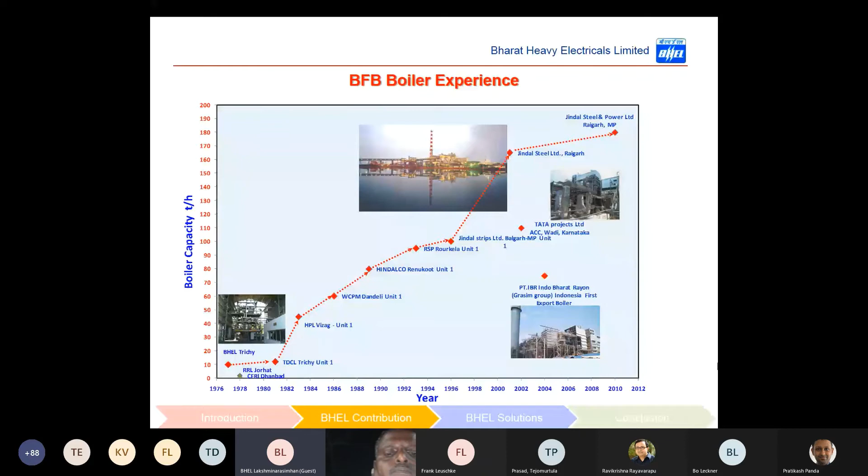So with confidence we can say that we have done up to 200 tons per hour. We can handle any fuel upwards of 1500 kilocalories per kg. And interestingly, we are able to handle ash up to 65%.

As somebody was trying to utilize the waste of somebody else, we can utilize ESP ash coming from power plants further to reduce the unburned carbon in some fired boilers, which I've also seen where the imported coal is very high. Unburned carbons are crossing 6 to 7%, restricting their usage in cement plants. Those sort of things can be burnt here further nicely.

Coming to CFBC boilers, I thank Frank Leuschke for explaining all the features of our technology. We had a collaboration from '93 that ended in 2003. After that, we have been jointly working for Neyveli and Bhavnagar, so that scale up also happened very fast.

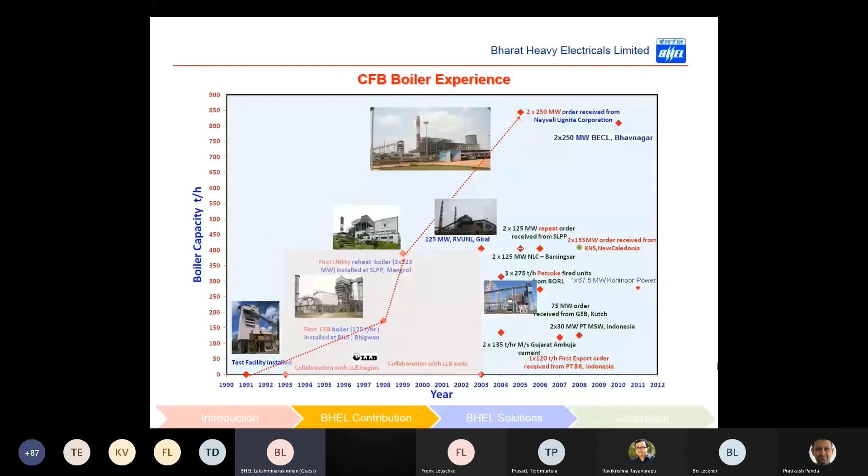To put a perspective of Indian power plants in the global context, I thank Foster Wheeler's people for representing the South Korean plant. That 550 capacity plant has scaled up really nicely. We are also coming up in the same majority of cases where power plants are there.

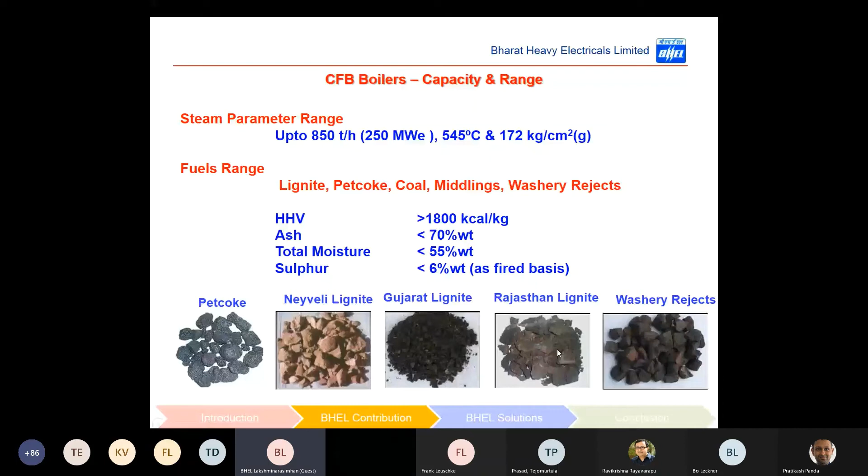Interestingly, it's a very similar capacity range which we are having as reference now, and I am pointing out two different varieties of lignite here. I'll come to this aspect slightly later. If you look at the offerings which we have, it's almost the same technology which people are talking about, except for a few variations.

Interestingly, all the integral FBHE and pant-leg designs have been jointly worked with Doosan, earlier Lentjes. One interesting aspect I would try to tell as part of this CFBC conference is the importance of cyclone efficiency. People had initially thought that the cyclone is a very static device that doesn't contribute much to the process, but we have learned in a very hard and better experienced way how cyclone efficiency improves the whole process.

I wasn't aware, from the presentation of the CFB materials group, how important or how costly the material is in Europe. If you really see, a properly designed cyclone would save nearly 3,000 tons of bed material. That is very important, and we customize our design based on the fuel. As Frank Leuschke was also mentioning, we need to be very clear about the fuel for which the boiler has to be designed. With that known, in most cases, we will not have any surprises.

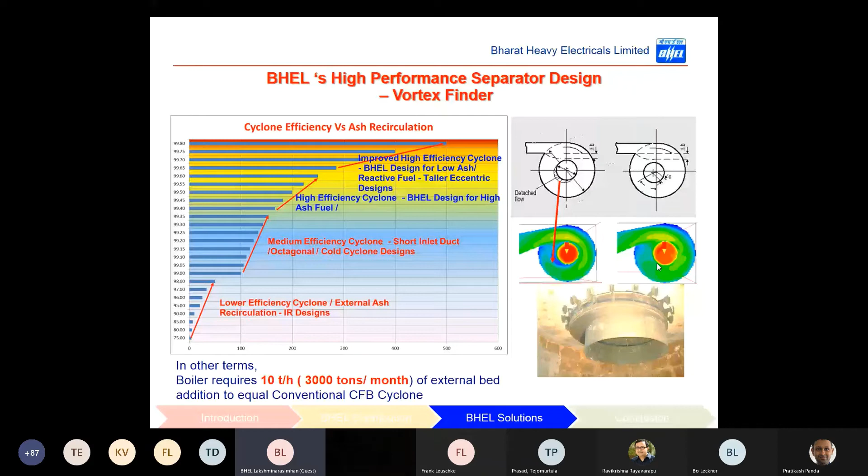BHEL has not only been selling boilers, but we have been very extensively developing an ecosystem through industry-institute interaction, with NITs and IITs. We have fortunately had interaction with our erection team, also with our manufacturing team, and extensive fuel testing in our test facility. All these things are going into our product design by means of operation feedback and operation philosophy.

Why I am putting stress on the terms operation feedback and operation philosophy is that most of our industry here is very much attuned to PF boiler operations, and not very conversant with CFBC systems per se. This needs to be much improved to ensure success of CFBC, as the chief guest rightly pointed out. So we did have a CFBC test facility right before we started the collaboration, so we were trying to scale up with a good knowledge base.

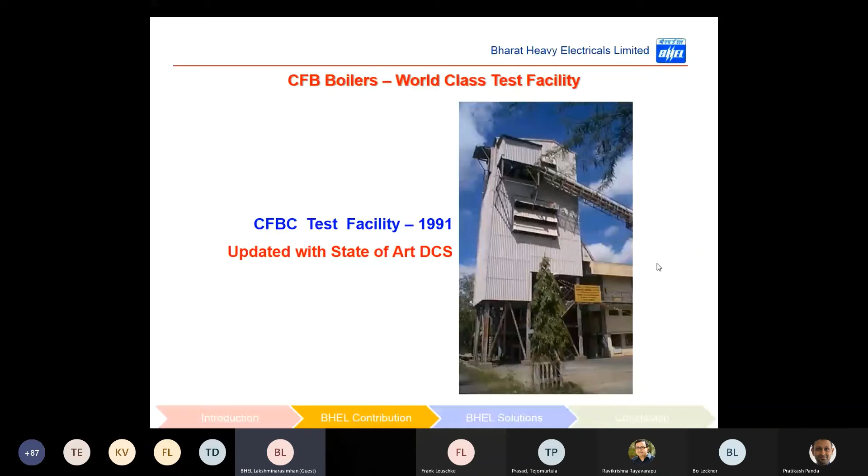As Leuschke was telling, we also have a similar simulation scale where we are trying to predict where erosion rates are going to be high and suitably design our cyclones and other areas of boilers.

One key point of this presentation is that many lab scale models or pilot test facilities will not reveal the surprises, because BHEL ventures into areas where fresh coal and lignites are sourced. Even though many tons of test lignite have been fired in our test boilers, different seams of lignite come with different issues on different sites.

For example, in Giral, even though the design was initially told around 4% sulfur, we were getting almost 6% and exceeding 7%. The problem was never with the fuel but with the limestone, which had very fine particle attrition locally. This resulted in a recarbonation issue, which was explained by the professor with the equilibrium conditions in the calcium oxide and carbon dioxide diagram. All these things were resolved, and we completed the performance test and handed over.

Next is Palana lignite, where we had a very different issue. Even though the same sintering phenomena was noted, the issue was related to the chemistry of the ash in two particular seams of the lignite. So such being the surprises even with lignite, that's what I was trying to explain - what the lab scale or pilot test will not show up are such variations which need to be carefully handled.

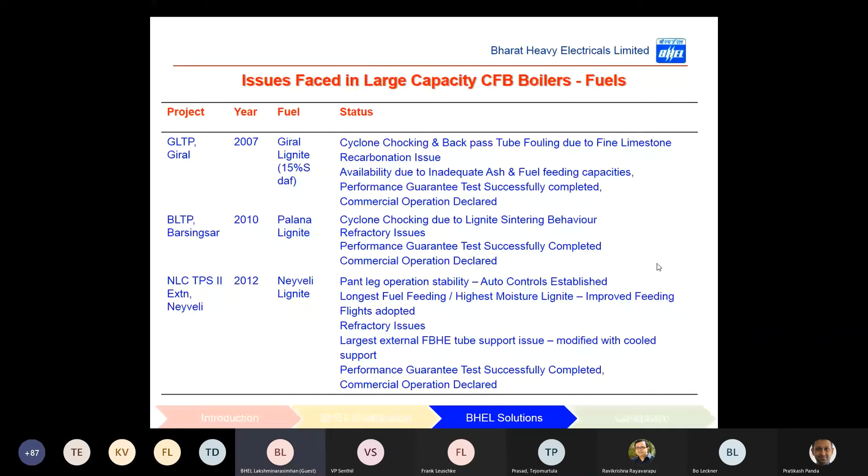Interestingly, when I talk about OTSC systems, we do have a test facility here to optimize the rifle tube configuration, especially for CFBC boilers. This is important considering our boilers need to accept biomass fuels and also operate at part loads in view of rising renewable injection in the grid. This aspect has already been taken up by BHEL, and we have fairly established the profile.

To give you a reality picture, we have already worked on and are pitching 350 megawatt designs, because we see a lot of retiring 210 megawatt and 250 megawatt units in the future, which were added in the late 80s. We have already come up with a solution where a small extension alone would be required to fit into the existing CFBC OTSC CFB boilers. So we already have a plan in place according to our government's vision, and we are ready to go ahead with this.

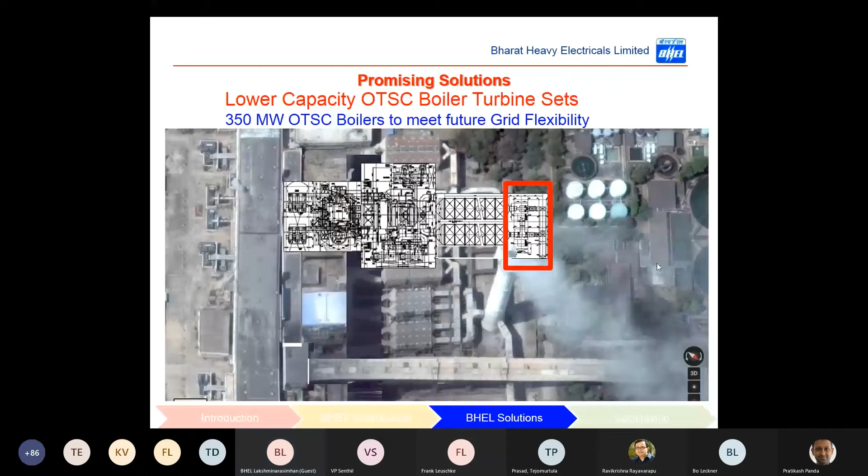And the other carbon capture strategy which we have talked about is integrated gasification combined cycle - I think the Chief Guest has told more than what I wanted to tell, but we wanted to give a latest update that we are ready with this design. We can even scale up to 182 megawatts. The only issue is, as somebody was also highlighting, the commercial motive has to be there from the users on the power sector side. So we are ready with the product. We have a gas turbine running there with syngas for quite some time, and we have very good operating experience with good carbon conversion efficiency.

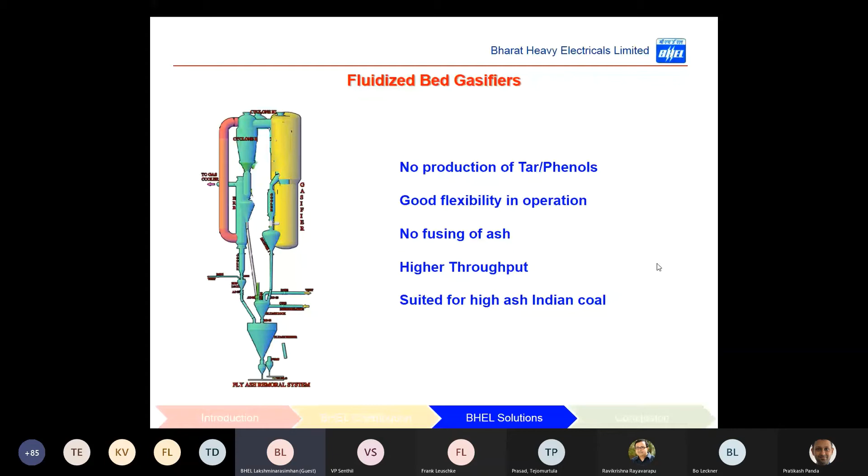So coming to the end of my presentation, clean coal technology, there is no mistake about that. It is a need of the hour for the entire decade, still to be stabilized with other sources of energy. We have contributed both in terms of combustion systems as well as gasification, trying to pioneer this way back from the 90s.

And because of our efforts, we have been able to develop an extensive ecosystem. For example, the refractory manufacturers were very much appreciative of BHEL's support in developing, because they are able to sell to other plants, including many other companies. So such an ecosystem was supported by BHEL so far, and we are really working with our customers to develop and be ready for the future. Thank you for your time, sir.

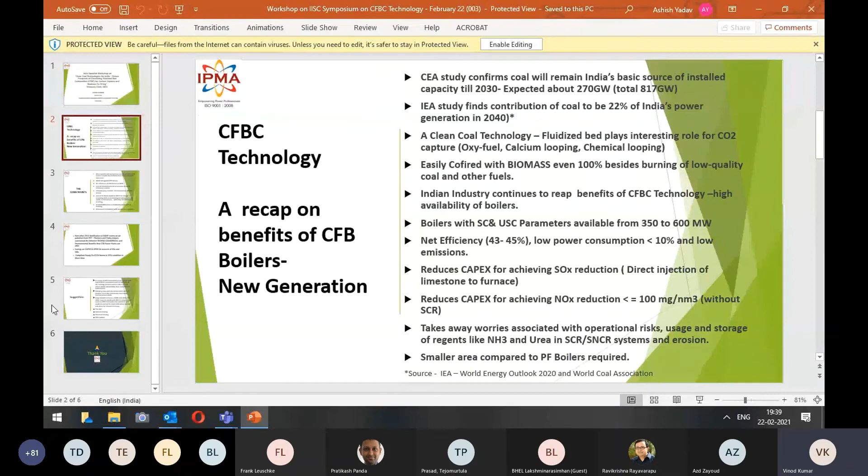by the Prime Minister himself, and therefore it is incumbent upon the industry of India that they should join hands to make this happen. If you have seen, since 1970, Dr. Bo Leckner and his professors have been working on this.

They developed the CFB boiler of 12 megawatts in their lab, and I happened to be shown around that plant by Dr. Bo Leckner. It shows how much work they have done, and today we are very fortunate that even at almost 7:45, people are still listening.

My request would be to Dr. Bo Leckner and Professor David to please continue your patronage to the university. I discussed this with Dr. Bo Leckner, and he says, Vinod, it would have been extremely good if there had been a face-to-face meeting, and this would have been in IISc Bangalore in the natural setting and clean environment.

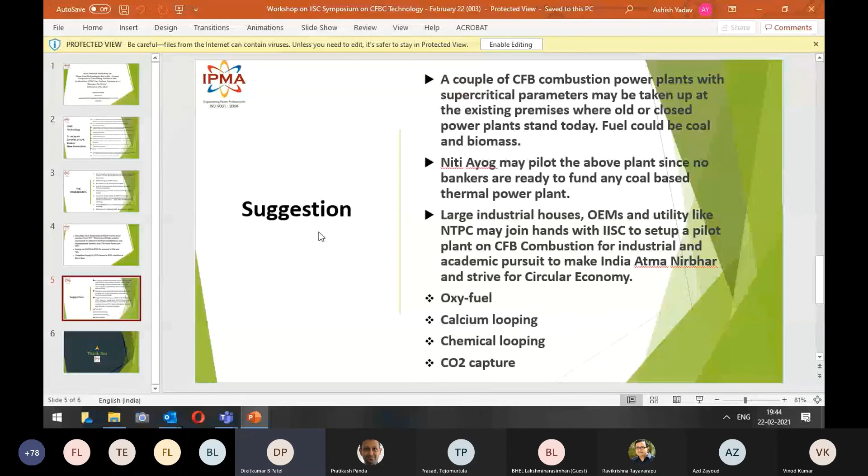Neither major erosion, fouling, nor any clogging has been reported so far. This is the benefit of a CFB boiler if it is designed and operated the way it is built. So far as emission control and temperature control, all the designs have been built into the CFBC supplied at Hazira and Dahej. We have a limestone control system and bed material control system for temperature control. Based on our learning experience, we have tried different types of material used as bed material also.

So today, in the context of India, CFBC is a learning curve for everybody, and the experiences shared are greatly helpful in achieving confidence and usage of these utility boilers and high scale boilers to ramp up the power needs of the country. Now, as discussed in major slides and whatever presenters have informed from different companies, in the Indian context...

What would immediately help is how biomass would be handled in the current coal and fuel handling system. Because when we say a mix of 10 to 15% can be used, I understood from all the manufacturers that their boilers are designed to meet 10 to 15% biomass straight away.